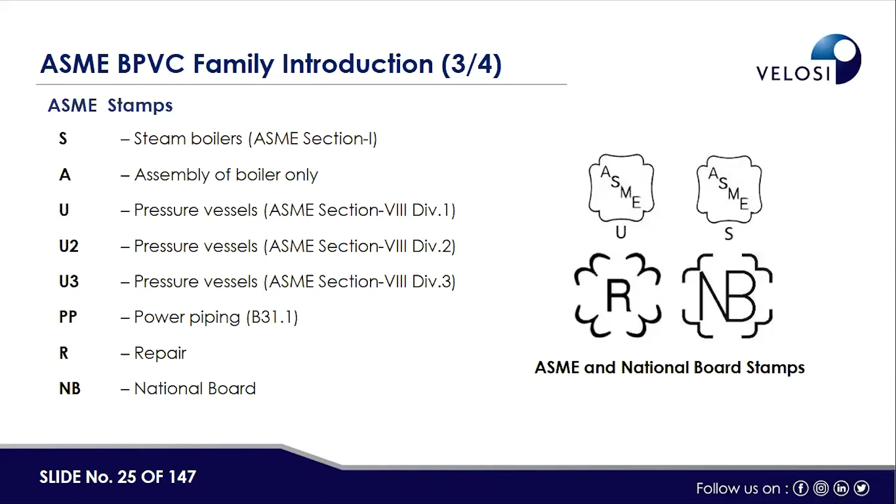See, you might have heard about ASME stamped vessels, or there are workshops who are producing or manufacturing vessels as per ASME Section 8, Division 1, or applicable codes, and they apply various stamps, which are called ASME stamped vessel, and these workshops who are manufacturing these vessels, they are also qualified and authorized by the ASME authorized inspection agencies.

ASME stamps: S is a steam boiler stamp, A is assembly of boiler only, U is a pressure vessel, applicable on ASME Section 8, Division 1. Then U2 is pressure vessel, ASME Section 8, Division 2. Then pressure vessel, ASME Section 8, Division 3. Then PP is power piping, R is for repair, and NB is for national board. Various stamps are there, which people may hear as they enter into the vessel industry.

Design and construction code, from a piping point of view: 31.1 as I referred earlier, then ASME 31.3. There's also for pipeline 31.4, 31.8. Then these codes like ASME Section 1, Section 3, Section 4, and Section 8, Division 1, 2, 3. These are normally called design and construction codes, whereas supporting codes are ASME Section 2, Section 5, Section 9.

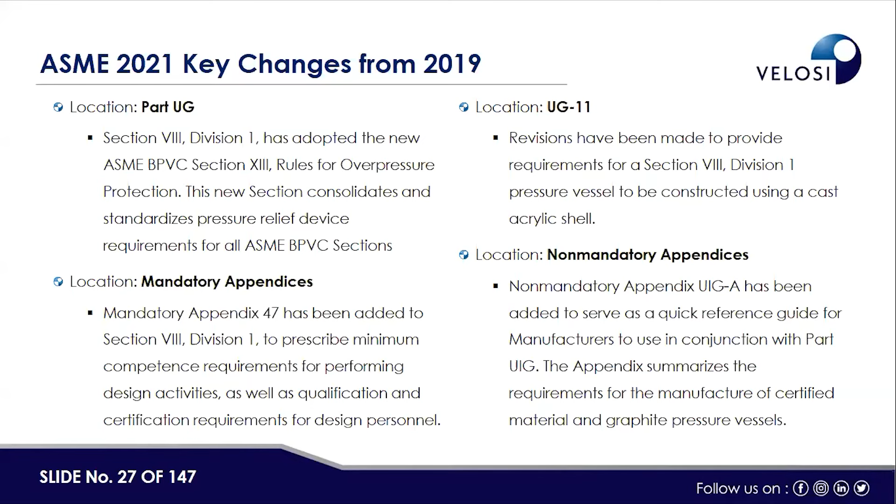Location part UG was changed, and location UG 11 was changed, and location mandatory appendices, certain changes are made, and location point of view non-mandatory appendices, certain changes are made. So we don't need to go through this, but we will from a presentation point of view. These are the details of what ASME publishes at the time of changes when a new edition is being issued.

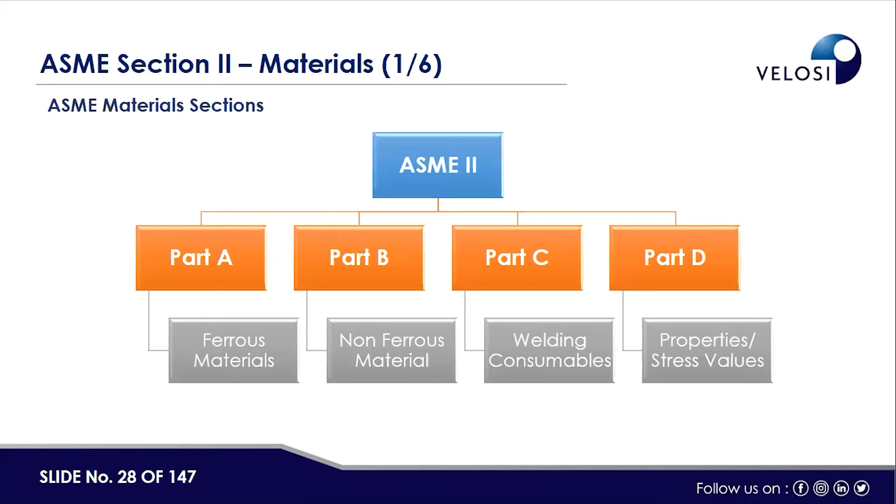Now, if we go to ASME Section 2, which is the first code, which is basically a supporting code. So it is a materials selection and material property code, where part A, part B, part C, and part D — part A is ferrous material, part B non-ferrous material, then part C is welding consumables, and part D is the properties and stress values of the various materials.

Then from ASME material introduction point of view, Section 2 — it is classified material based on name and grade. Ferrous materials start with SA, non-ferrous materials start with SB, welding rods, electrodes, and filler material start with SFA. Part A, B, C provide information regarding ordering information, manufacturing processes, hot cold forming, normalizations, and others.

Then chemical properties like carbon, manganese, sulfur, and other contents of the material — it's for steel materials or non-steel materials both. Then mechanical properties like yield, tensile, elongations, hardness, and other properties. Supplementary requirements, which are lamination and impact tests.

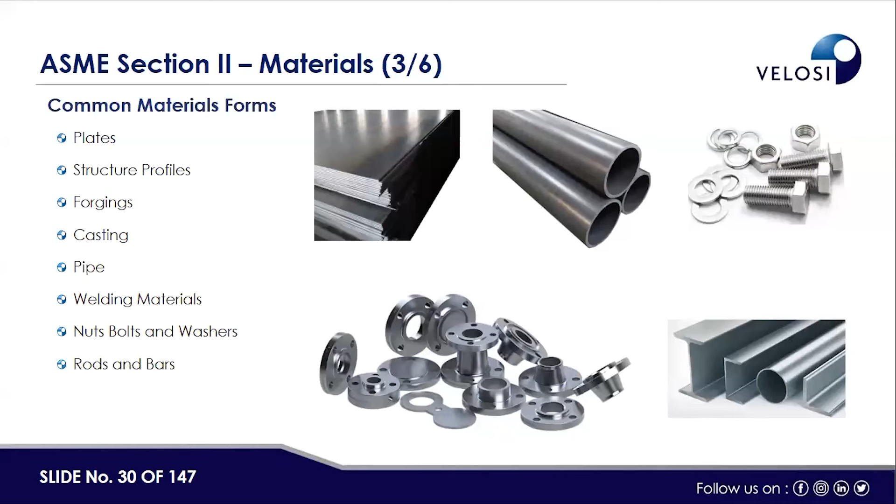Common material forms point of view are shapes what we normally use — these are plates, structural profile, forgings, casting, pipe, welding materials, nuts, bolts, washers, rods, and bars. Like all materials which are used for manufacturing of pressure vessels or pressure containing components, there could be various shapes. So we should be familiar with those.

Then in Section 2, next is types of material. Carbon steel is one type, low alloy steel, high alloy steel, then non-ferrous material, cladded materials. So carbon steel family point of view, the names which are common are SA 516 grade 70, 60. Then there's also SA 285 for piping. There's SA 106 grade AB and SA 53. For flanges, SA 105. And for structural steel is SA 36.

Low alloy steels like SA 387 grade 11. Then high alloy steels are SS, duplex, and other materials. So from a family point of view, if we try to see, like for a carbon steel family, there are various types of materials which are used for pressure vessel components, like plates, pipes, forgings, fittings, and bolting.

So in the same carbon steel family, we try to see plates, let's say SA 516 grade 70, 60, 65, or SA 515 or SA 455. For that, pipe will be coming with a material SA 53 grade B or grade A, SA 106 grade A or grade B. Similarly, forging or the flanges part will be coming as SA 105 or SA 181. Then there is a fitting like SA 234, and bolting material goes by SA 193-B7 as well.

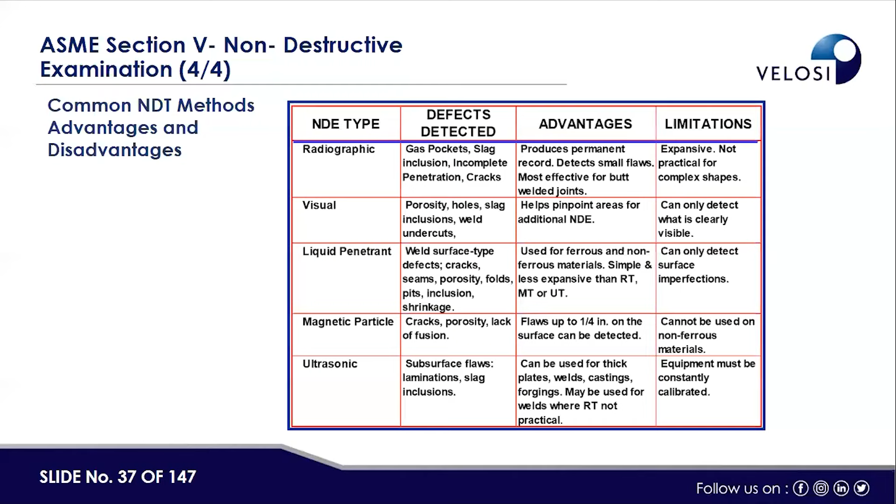Magnetic particle testing is the second technique, but it is used only on ferrous material, where you spray or put iron particles, then bring a magnet, and it tells you the continuity or discontinuity of the surface. Ultrasonic testing uses a reflection or refraction technique of rays. It can be used to see thicknesses and lamination in the material.

So next code is ASME 9. ASME 9 is basically the welding, brazing, and fusing code, for when plates or materials are welded together to make a pressure vessel. So ASME Section 9 provides all the guidelines to carry out welding, brazing, or fusion activities, which are used for building pressure vessels.

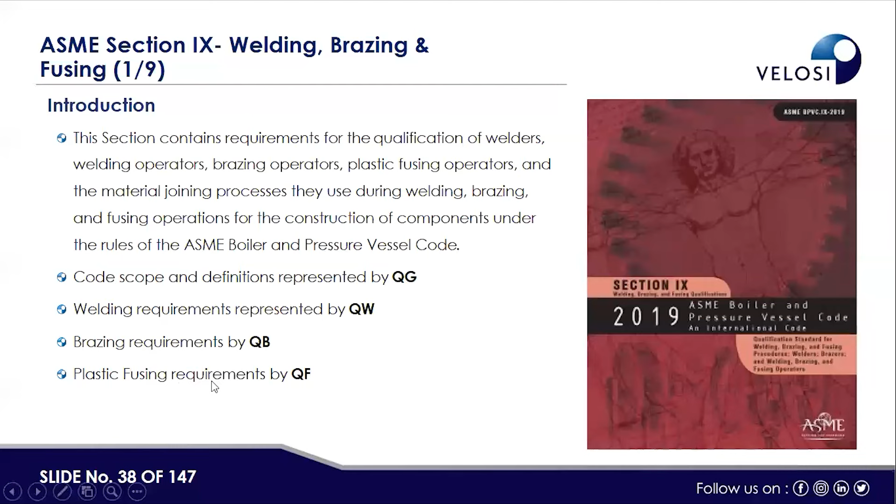From a definition point of view, the code scope and definitions are represented by QG in the code. Welding requirements are represented by QW, brazing requirements by QB, and plastic fusing requirements by QF.

By definition, welding is a technique that joins metals by melting the base metal and causing fusion. Brazing is the metal joining process which produces coalescence of materials by heating them to a suitable temperature and using a filler metal having a liquidus above 840 degrees Fahrenheit or 450 degrees Celsius and below the solidus of the base material. The filler metal is distributed between the closely fitted surfaces of the joint by capillary action.

Fusing is the coalescence of two plastic material members by a combination of controlled heating and application of pressure approximately normal to the interface between them. So these are the three techniques. In pressure vessels, we normally go by welding, and more knowledge is required regarding welding.

Under welding, QW covers the welding requirements, and this is further subdivided. Welding general requirements is QW 100 to QW 190. Welding procedure qualification is covered under QW 200 to QW 290. Welding performance qualification is covered under QW 300 to QW 380. Welding data further covers QW 400 to QW 490. Standard welding procedure specifications are QW 500 to QW 540.

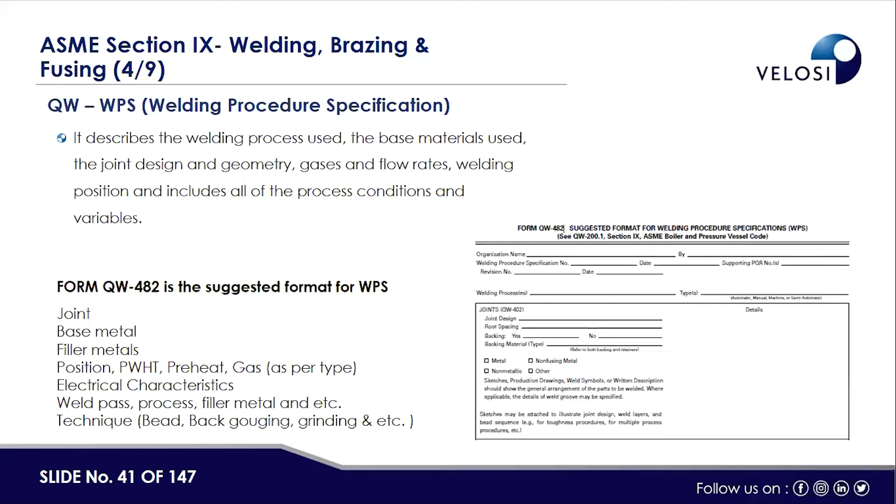There is a form covered under form QW482, the suggested form for WPS, where details can be seen in the standard, which is QW482. It covers joint, base metal, filler material, position, PWHT, preheat, gas type, and electrical characteristics, weld pass, processes, filler metal, and techniques like bead, back gouging, grinding, etc. From a knowledge point of view, you should know these guidelines are available in the standard, and we don't need to remember them by heart.

Then PQR means procedure qualification record. When a WPS is written, it should be practically qualified and applied by a qualified welder. Then whatever the preheat, filler material, position of the weld, speed applied, the weld quality is further checked if we got a homogeneous weld meeting all the required specifications for the welding object. So the document that qualifies the welding procedure specification is called the procedure qualification record.

To qualify a WPS, a procedure qualification plate is welded in accordance with the code requirements and actual test parameters are recorded. Form QW483 is the suggested format to record the PQR.

When the welding process or WPS is being applied, it is applied by welders, by people, or by machine. In that scenario, welder performance qualification is also a mandatory requirement, so it can be ensured that both the technique and the welding process and welder are intact, there is no risk for the object, and we will get homogeneous welding quality. The document required by this code is form QW484, the suggested format for recording WPQ.

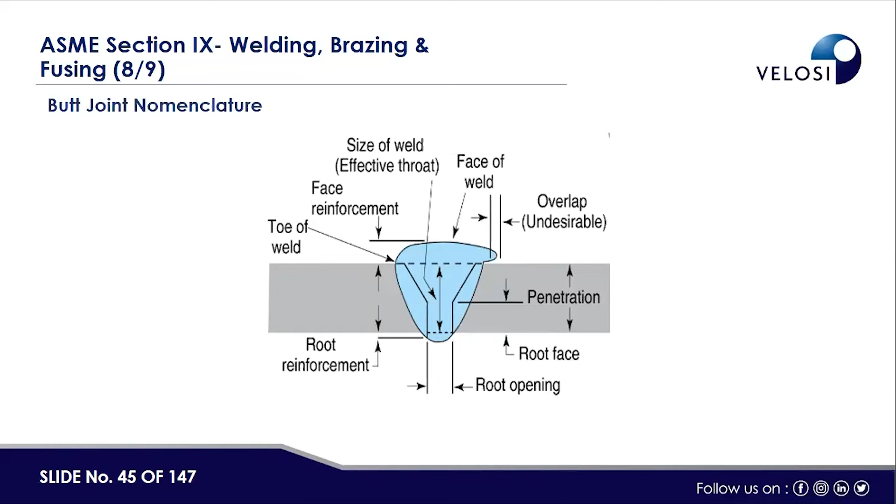Once it's fit up, there are various weld areas. In the bottom, this is called the root opening, then root face. There is penetration from the weld area point of view, face of the weld, size of the weld, effective throat. Then there is face reinforcement on top of the weld. Toe of the weld is where the weld is on the corners, and root reinforcement. So there are various terminologies used while talking about weld inspection, WPS qualification, PQR, or records point of view.

Common weld defects - it's not easy if anyone can come and make a pressure vessel. It's a very sophisticated technology, to be governed by properly qualified people, and the job should be done by qualified welders. If a non-qualified welder does the job, there could be issues, and various kinds of defects could be present in the welds of pressure vessels.

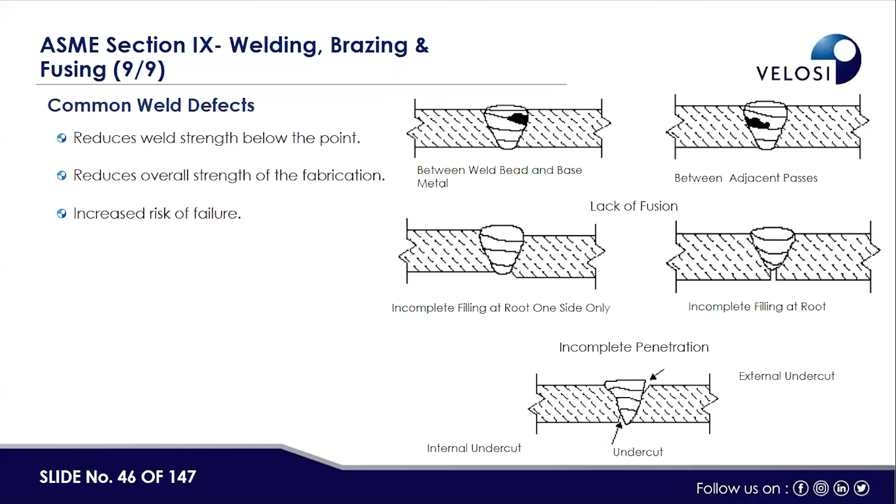Then we are going to another standard after ASME 9, which was basically talking about welding processes and WPS, PQR, and what kind of defects there are, then the common joint types and various forms. This we covered, and these are available in ASME Section 9.

Now, there are flanges connected with the nozzles of the pipes and nozzles of the pressure vessel, and all flange connections are governed by ASME B16.5, called pipe flanges and flanged fittings. This standard covers flange diameters from NPS 1/2 to NPS 24, used to connect pipes and components like valves, strainers, and others, and identifies acceptable pressure-temperature combinations. There are 7 classes in pressure vessels: 150, 300, 400, 600, 900, 1500, and 2500 ratings. Flange strength increases with the class number; material and design temperature combinations without pressure indicated are generally not acceptable.

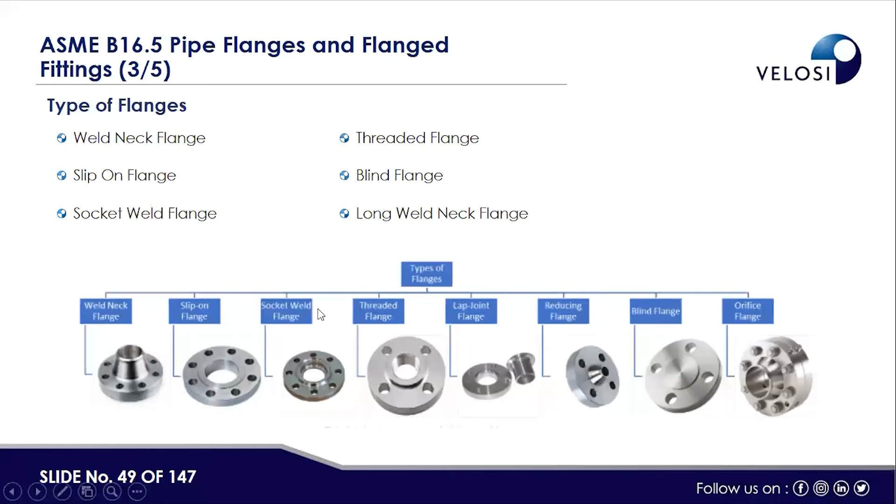Then orifice flange. So various kinds of flanges are there which are used for pressure vessels or for connection of the pipes.

In the construction of pressure vessels, a combination of various kinds of materials would be required because everything is not made of similar carbon steel material or SS material.

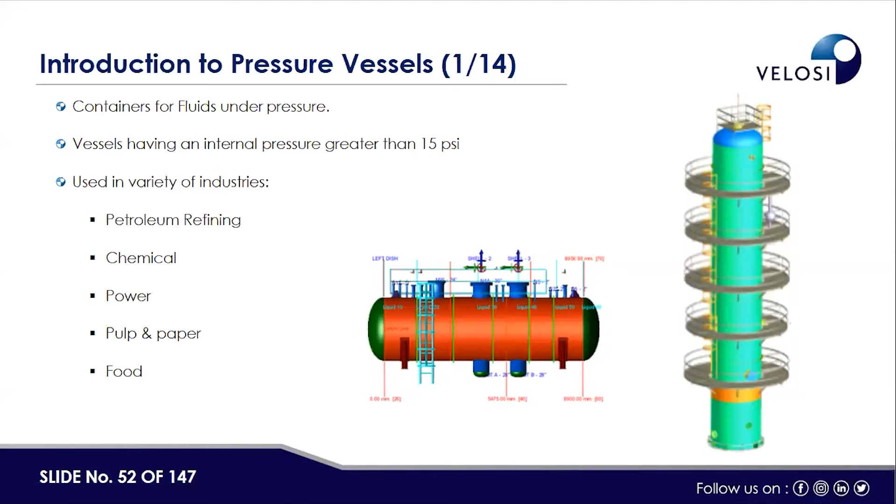Pressure vessels are used in various industries: petrochemical, upstream, downstream, refineries, chemical plants, power plants, pulp and paper, food industry, and pharmaceutical industry. So pressure vessels are used widely.

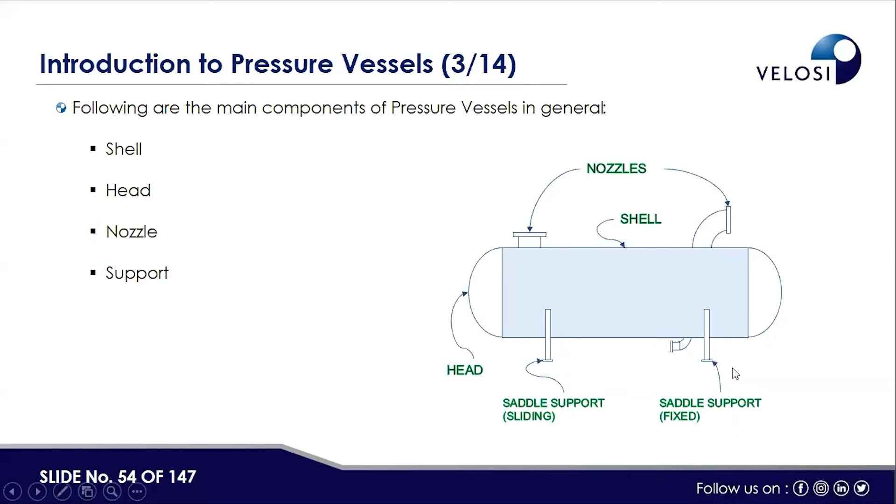So in a normal type point of view, as in the previous slide, there's a shell, head, nozzle, and support. The shell is here, and the nozzles are flange nozzles, and this is a saddle support, which is at the bottom side of a horizontal vessel - just to get familiar, for people who are new to pressure vessels.

The shell is the primary component that contains the pressure in the vessel. A pressure vessel shell is formed from different plates welded together to form a structure that has a common rotational axis. Shells are either cylindrical, spherical, or conical in shape generally.

The nozzles, like when a pressure vessel is connected with incoming pipes and outgoing pipes, you need to have those connections, and that's called a nozzle. A nozzle is a cylindrical component that penetrates into the shell of the pressure vessel or head of the pressure vessel to allow entry or exit of fluid from the pressure vessel.

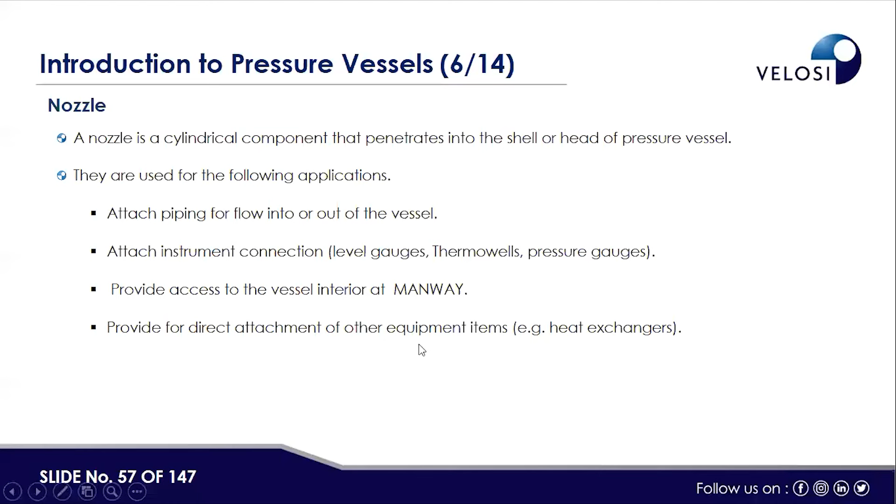They are used for the following applications: attaching piping for flow into or out of the vessel, attaching instrument connections like level gauges, thermowells or pressure gauges, providing access to the vessel interior at a manway (manways are also a form of nozzle), and providing for direct attachment of other equipment items, for example, a heat exchanger could be connected directly to the pressure vessel.

Supports: a vessel has to be supported vertically or horizontally, and these supports are also welded with the pressure vessel. Support is used to bear all the load of the pressure vessel, earthquake and wind loads. There are different types of support used depending on the size and orientation of the pressure vessel. It is considered to be the non-pressurized part of the pressure vessel.

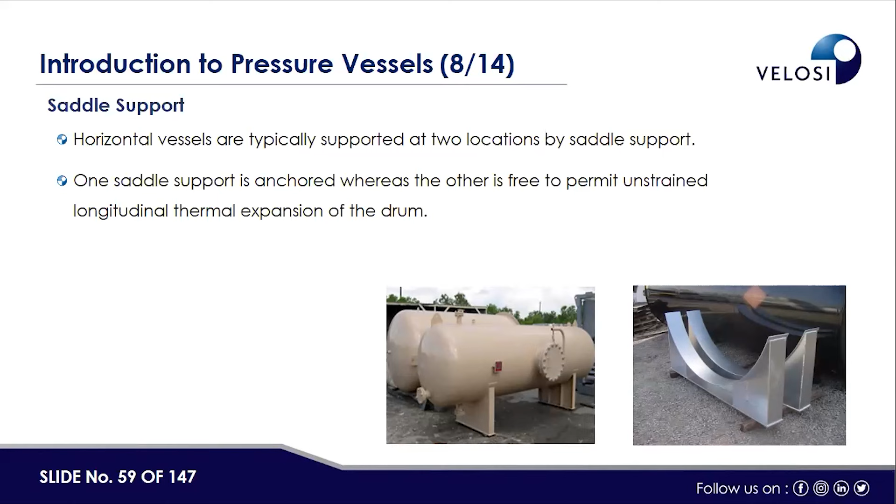A saddle support is used for a horizontal vessel. There's a bottom plate which you can see here, called basically saddle supports. When applying these supports, one side is normally fixed, the other is sliding, so the thermal expansion of the horizontal pressure vessel could be accommodated.

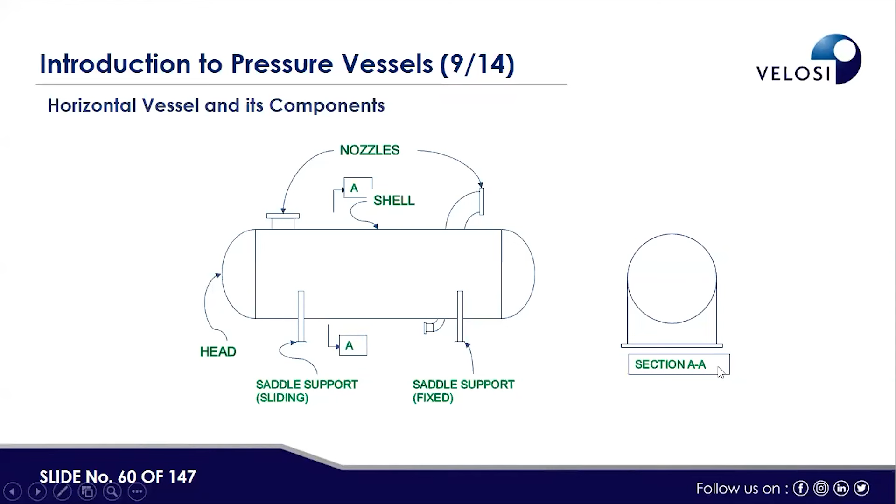So again, the component is coming for a horizontal pressure vessel as well as a vertical pressure vessel. This saddle support comes at the bottom, the others are the shell, nozzle or head. And section-wise, if you see a pressure vessel on one side, it looks like this.

Leg supports: some pressure vessels are supported by various kinds of supports - leg, lug, skirt. These are the three main names used for supporting pressure vessels. Leg means these are the legs you can see on the side, and spherical vessels are also supported by legs. Small vertical drums are typically supported on legs that are welded to the lower portion of the shell.

Reinforcement pads are welded to the shell first to provide additional local reinforcement and load distribution. Support legs are also used for spherical pressurized storage vessels.

So this is a vessel. A vessel is supported on a platform intermediately. These kinds of supports are called lug supports.

Then the example of a vertical reactor. What could be new in the vertical reactor? There could be a catalyst bed, or catalyst bed support, lower catalyst bed, and then the lowest bed catalyst bed support also. Then head, inlet nozzle, outlet nozzles, and outlet collector or shell.

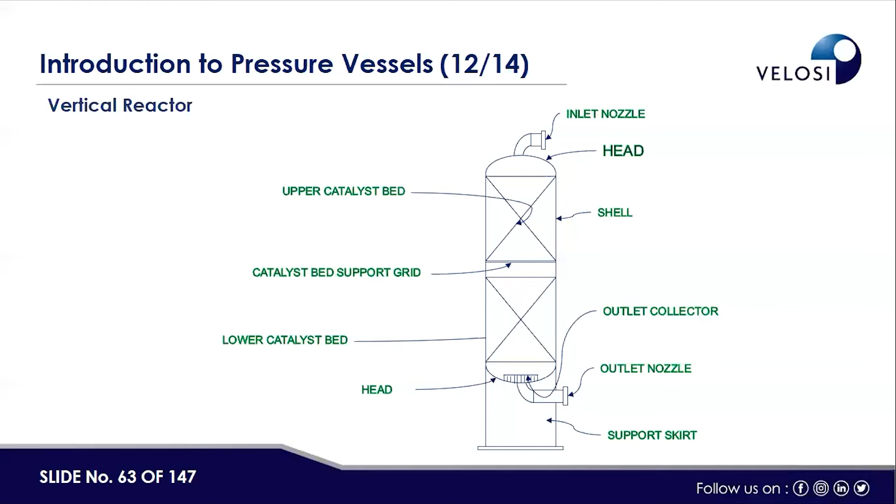So if we change this pressure vessel into a reactor form, there would be changes only in the internals. Outside, it will remain just like a pressure vessel. There would be additional fittings made inside the pressure vessel, or there could be a catalyst, and various distribution equipment installed inside the reactor.

Skirt support, for example, a vessel supported at the bottom. If you see this vertical vessel, this part is called skirt support. And if we make a model in PV Elite, this conical part is called bottom skirt.

There could be a top skirt also if it's made in two parts, like a vessel starting here in the head onward, and the bottom part is called skirt. Skirt is a non-pressure bearing component, and it is made to support the pressure vessel at the location where it is installed.

Then vessel support design: how we design these pressure vessel supports. There is an equation, normally we call it for horizontal vessels the L.P. Zick method. Commonly governing the stresses in the saddle support are bending stresses, tangential stresses, circumferential stresses, horn of saddle, and bottom of the shell. The supports are designed on wind and seismic codes.

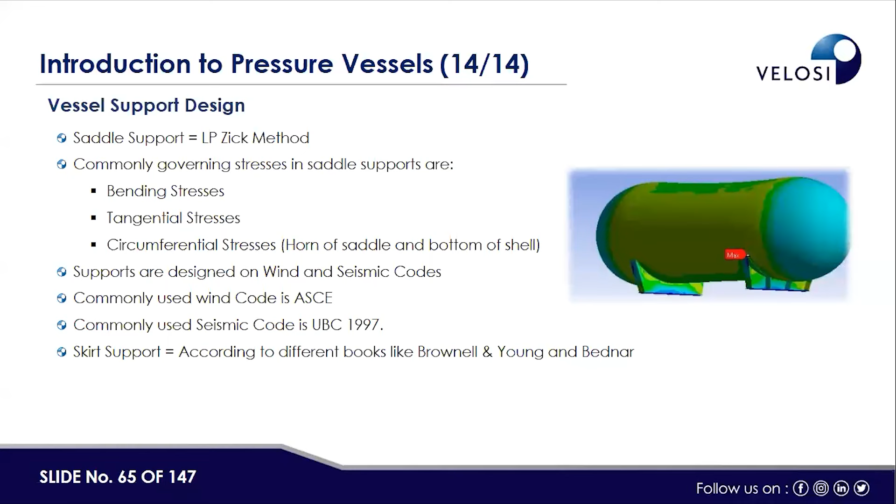Commonly used wind code is ASCE, and commonly used seismic code is UBC, which is normally called the building code. Then skirt support is designed according to different books like Brownell and Young, and like Bednar. These are basically the handbooks which are also available to design the vessel skirt supports.

ASME Section 8 provides requirements applicable to the design, fabrication, inspection, testing, and certification of pressure vessels operating at either internal or external pressure. This code was established in 1925, Section 8 Division 1. ASME Section 8 Division 1 operating pressure ranges from 15 psig to 3000 psig.

It works with a safety factor of 3.5. Before year 2000, this safety factor was 4, and it was reduced to 3.5 during the year 2000. It works normally under the membrane stress formulas, both longitudinal and circumferential stresses.

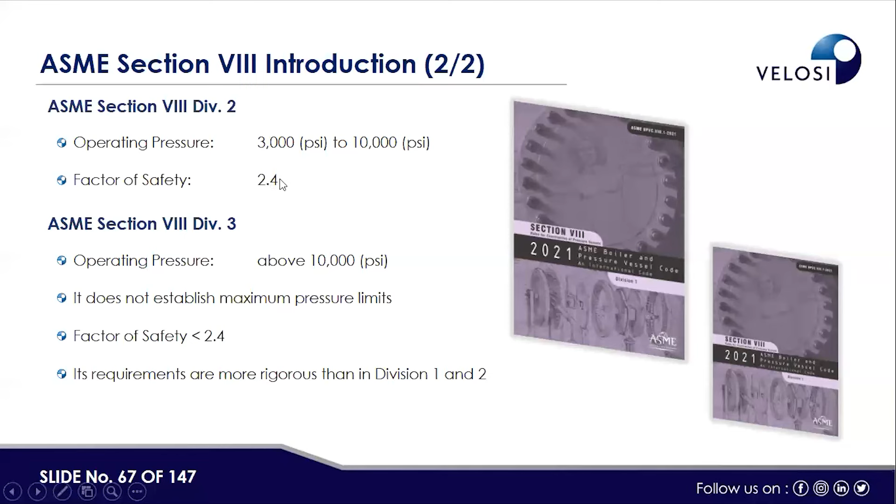Normally in the oil and gas industry, we remain between ASME Section 8 Division 1 and Division 2. I have never come across Division 3 for pressure vessels.

So now here, various codes by U1, U2, U3, U4, and U5: scope, general, standard reference by this division, units of measurement, tolerances, then section. This is how the code is organized.

From an information and index point of view, when we say anything under UG, it will be providing design guidelines with reference to materials, design itself, fabrication, general requirements. UG means general requirements with reference to inspection, marking, and over pressure protection.

Then subsections, for example, UW means welded pressure vessels. UF means forged pressure vessels, if there are any. Then UB means brazed pressure vessels.

Then some sections, from a material point of view: UCS is carbon and low alloy steels, UNF is non-ferrous material, then high alloy steel and so on.

So depending on what kind of material is being used for the pressure vessel when we go to the design side, we can go to the relevant section. For example, if it is a low temperature service of a pressure vessel, then ULT, low temperature service, can be applied. Similarly, cladding and lining aspects are covered under UCL.

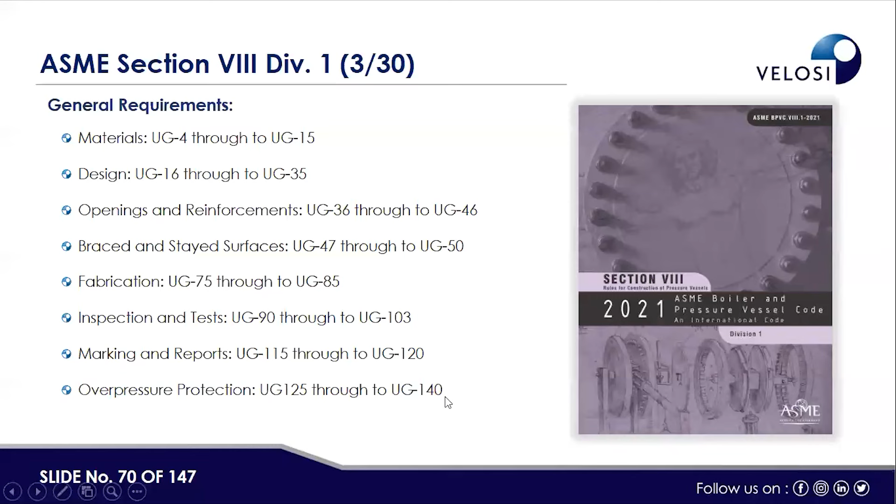Then fabrication aspects are covered under UG75 through UG85. Inspection and tests are covered under UG90 through UG103. Marking and reports are UG115 through UG120. Overpressure protection is UG125 through UG140.

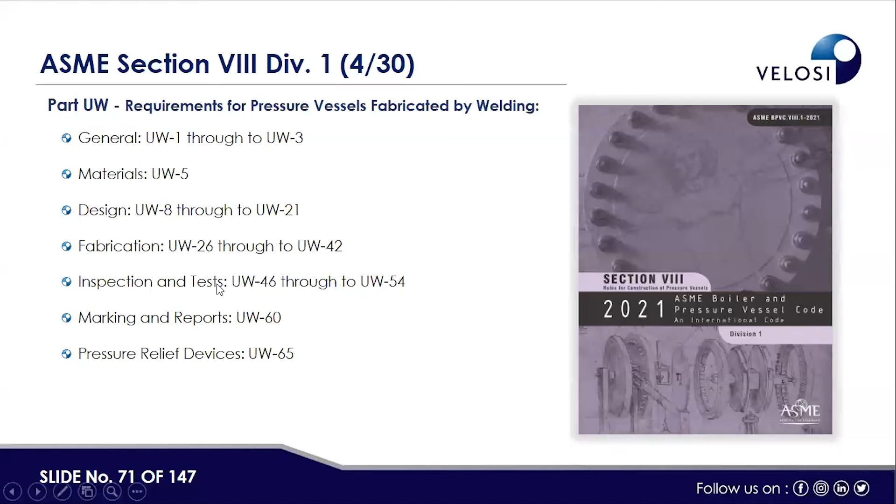Then requirements for pressure vessels fabricated by welding, the UW part, the first part we covered as the UG part, general requirement. Now UW requirement, from a welding point of view: general through UW3, then material UW5, design UW8 through UW21, fabrication UW26 through UW42, and so on.

Then UCS, requirement for pressure vessels constructed of carbon and low alloy steels. So UCS1 general, materials UCS5 through UCS12. Here UCS66 is more common at low temperature, that is MDMT, impact testing. So UCS66 is a more common standard clause which I think most pressure vessel designers are familiar with.

And they need to keep that also for the prevention of fatigue failure or brittle fracture failure of pressure vessels. Then fabrication UCS75 through UCS85, since most pressure vessels are fabricated or made of carbon steel and low alloy steels. So these clauses are more relevant to us in normal day-to-day use.

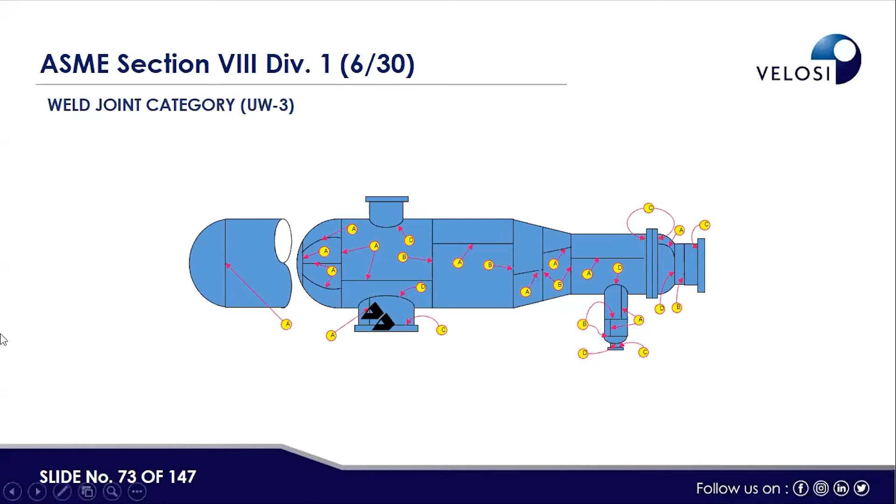When we're making a pressure vessel, if it's a horizontal one like a reboiler, it gives a good example of how it would be welded and what kind of welds would be applicable. Here the types of welds are like a butt joint, a straight one - A type, then B type, D type, B type.

Various types of welds are configured for welding design and quality control purposes. If you see acceptable joint categories A, B, C, D, these are based on what kind of radiography or how much radiography would be done. Full radiographic efficiency could be 1, spot could be 0.85, and with no radiography we have to take the joint efficiency as 0.7. That's used further when calculating the hoop stress formulas.

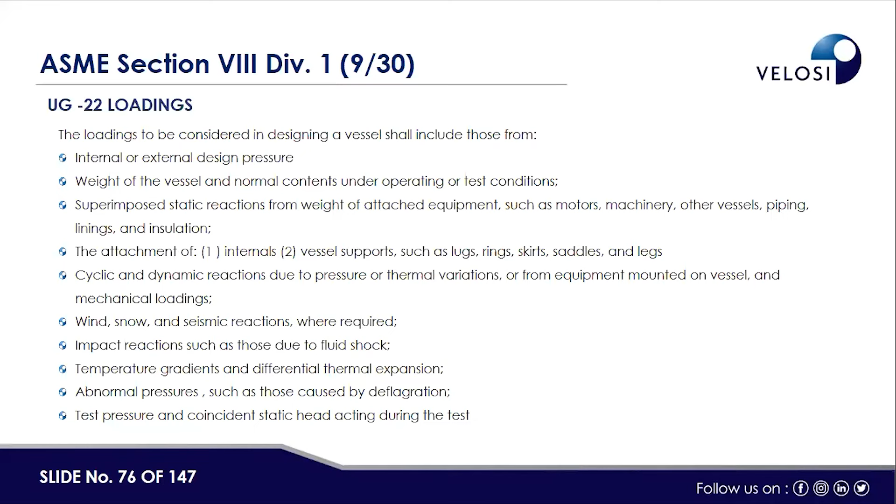The pressure vessel might be designed under cyclic service, in which case cyclic load has to be taken. There could also be wind load, seismic or earthquake loads, and piping connected to it, so their loads might also come on the nozzles of the pressure vessel. We need to consider all applicable loads while designing the pressure vessel itself, its supports, and its nozzles.

Now, minimum thickness requirement, for example under UG16: for general service, any pressure vessel thickness should not be less than 1.5 mm. For air, water, or steam service, the minimum thickness of any pressure vessel, irrespective of diameter, should not be less than 2.5 mm. Similarly, for unfired steam boilers, the minimum thickness referred is 6 mm in UG16 of the standard.

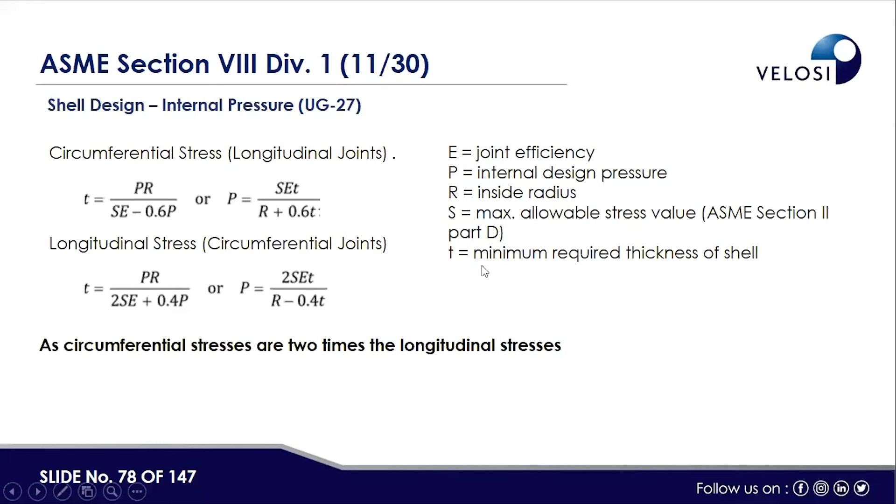These are just formulas - hoop stress formulas for circumferential stresses and for longitudinal stresses. If you see from the longitudinal stresses point of view, the thickness required is half of the circumferential. So circumferential stresses are almost double the longitudinal stresses, where E is joint efficiency, P is internal design pressure, R is inside radius, S is maximum allowable stress value, and T is the minimum required thickness of the shell.

Similarly, for elliptical heads, similar formulas apply with little modification, and for hemispherical heads as well. For flat head design under internal pressure, the formula is t equals d root CP over SE, which is covered under UG34, whereas UG32 is for the elliptical or hemispherical heads.

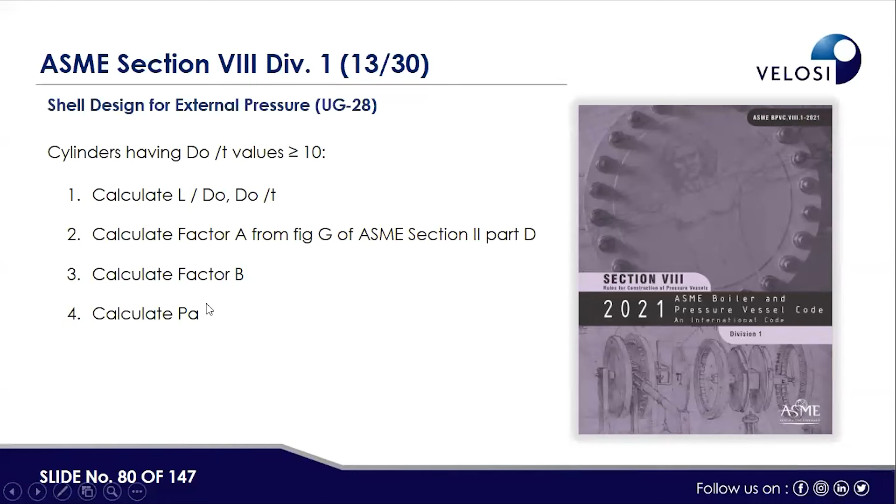Shell design for external pressure is also important. Here, if D naught to T value is greater than or equal to 10, calculate L over D naught first, then calculate factor A for figure G of ASME section 2 part D, calculate factor B, and calculate PA. Accordingly, the stiffeners and external thickness aspects are calculated.

Then design of the pressure vessel nozzles, nozzle opening, or reinforcement - these are covered first by UG37 onward for design guidelines. Then the pipe, which is used for the nozzle of the shell like a cylinder, is covered by ASME B36.10. Flanges are covered under ASME B16.5. Reinforcement pads are designed as per the code.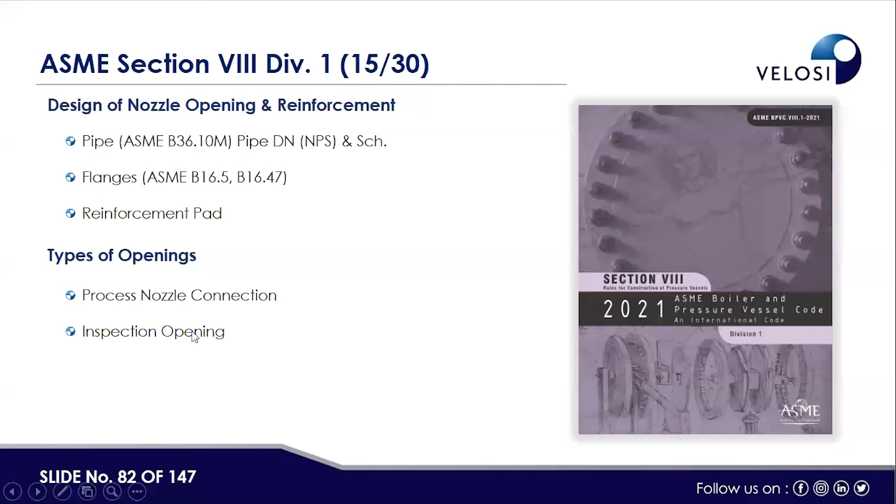The type of opening could be a process nozzle connection or an inspection opening. Process side connections are with pipes or instruments, while inspection openings could be manways. These nozzles can be connected as pipe welded to the shell, then pipe connected with the flange and reinforcement pad, connected with the incoming piping or instruments.

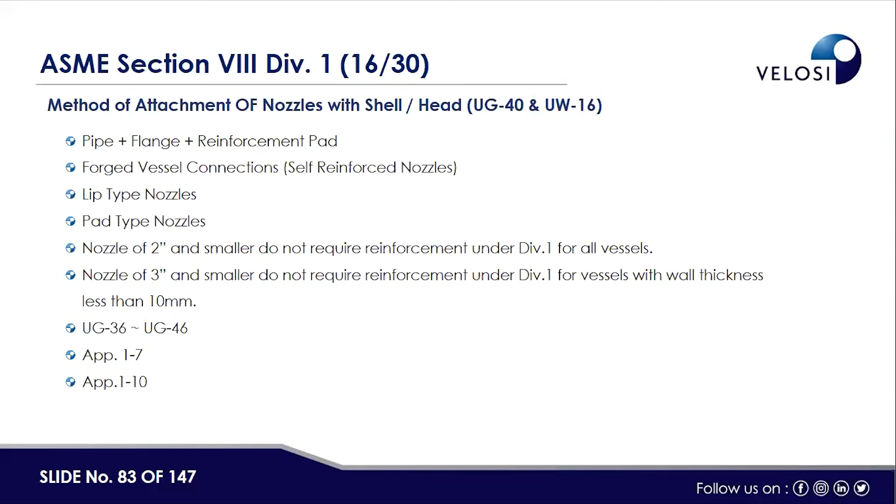Then forged vessel connections, self-reinforcement nozzles, lip type nozzles, and pad type nozzles are also there. Nozzles of 2-inch and smaller do not require reinforcement under Division 1 for all vessels. Nozzles 3-inch and smaller do not require reinforcement under Division 1 for pressure vessels with wall thickness less than 10 mm. UG36 to UG46 are helpful for calculation of nozzle reinforcement. Also, Appendix 1.7 and Appendix 1.10 are guidelines for nozzle design and reinforcement.

From a limitation point of view, what would be the maximum nozzle diameter? For a vessel where the diameter is like 1.5 meters or 1500 mm, the nozzle diameter is half of the vessel diameter, but not more than 500 mm.

It is not the case that we can make any size of nozzle on a small diameter vessel. If the diameter of the vessel is greater than 1500 mm, then it can be up to 1/3 of the vessel diameter, but not more than 1000 mm. Exceeding these limits, additional requirements of Appendix 1.7 shall be applicable. Nozzle may also be designed with alternative rules of Appendix 1.10 pressure design. These are applicable as well.

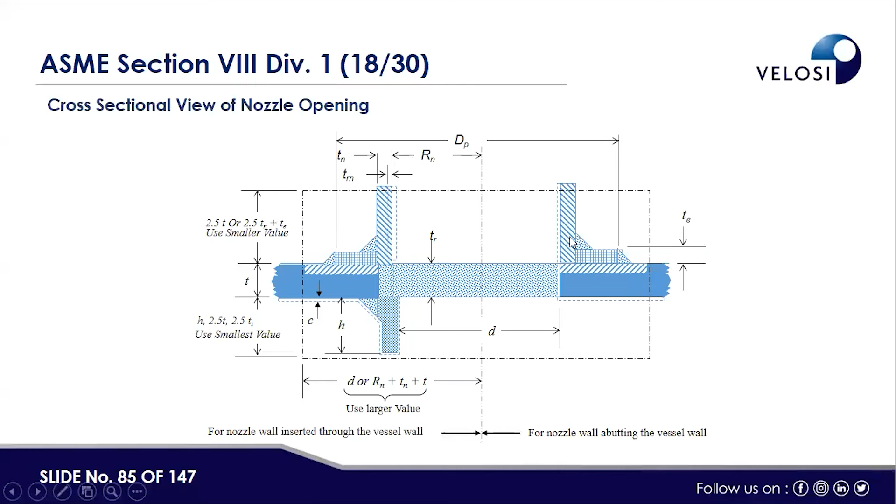So here, if you see the nozzle on a pressure vessel, it is showing various kinds of connections. It's not practical, but it is shown like there could be a reinforcement pad, the base metal, the nozzle itself, and welding - fillet welding, butt welding. Those aspects are shown in this drawing. And here, internal diameter, external diameter, the various dimensions marked on the drawing, base metal itself, reinforcement, or the edges are also shown here.

Then additional reinforcement, for example reinforcement pad, necessary if insufficient excess thickness, must be located within the reinforcement zone. Allowable stress of reinforcement pad should be same as that of shell or the head. Additional reinforcement sources like pad could be, or additional thickness in the shell or lower part of the nozzle could be an integrated part as well.

Then, design of the nozzle opening and reinforcement, the method used by UG-37 and Appendix 1.7 for reinforcement of the nozzles. The simplified ASME rule, area replacement - metal used to replace what is removed should be compensated, must be equivalent to the metal area which is removed by the nozzle, if the same can be provided by the reinforcement pad. Must be adjacent to the opening. Limit of reinforcement is defined under UG-40.

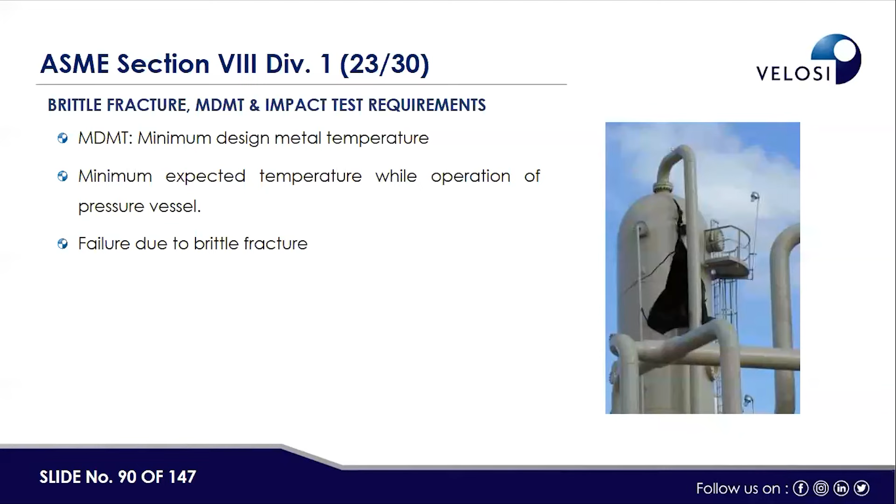So brittle fracture and MDMT, meaning minimum design metal temperature, and Charpy test or impact test - these are the very commonly used terms in welding qualification, WPS qualification of pressure vessels. MDMT is the minimum design metal temperature, the minimum expected temperature during operation of the pressure vessel. High temperature we always take care of, so we have to take care of low temperature as well. Failure due to brittle fracture means if toughness of the material is lost due to low temperature, and if load is applied at the same time, then the vessel may fail.

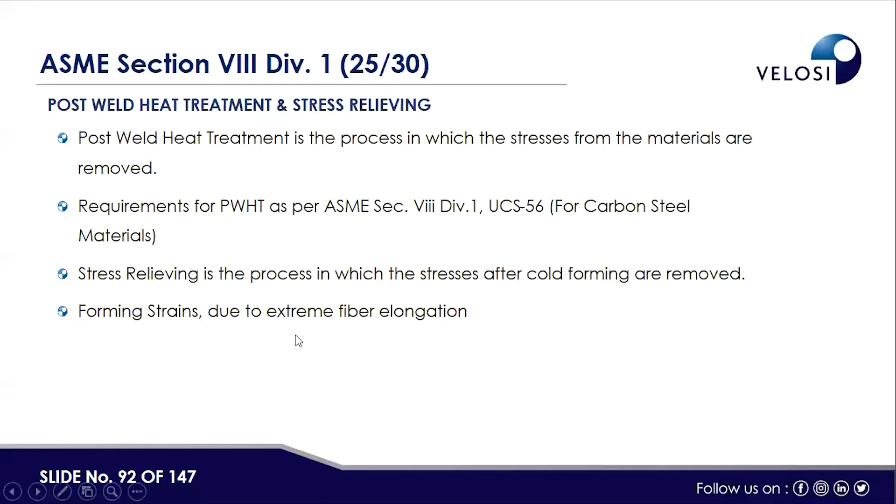PWHT is done to minimize the stresses or residual stresses in the weldments which could be caused by the welding activity. Post-weld heat treatment is the process in which stresses from the material are removed. Requirement of PWHT as per ASME Section VIII, Division 1, UCS 56 for carbon steel material should be referred. Stress relieving is the process in which stresses after cold forming are removed, as the forming strains due to extreme fiber elongation could be caused.

When post-weld heat treatment or stress relieving is required as per UW2, UW40 and specification, PWHT must be performed according to UCS 56 and table UCS 56 as well. Review the PWHT specification for specified thickness and material, and verify the PWHT graph as per UCS applicable standard requirements. So PWHT and UCS 66 are the two requirements which are applicable based on the thickness and nature of service of the pressure vessel.

Hydro testing: once the vessel is fabricated and ready to go for installation, hydro testing is done. Before that, under fabrication stage, various kinds of NDT tests are done, then under welding qualification, UCS 66 Charpy test or welding qualification test and mechanical tests like tensile stress tests are conducted. If due to thickness some PWHT is required, that is covered under UCS 56, and hydro testing is the last activity when the vessel is ready to go.

This is a non-destructive test part, and normally the hydro test pressure, for a water-filled vessel, is tested at 1.3 of MAWP multiplied by lowest stress ratio. Lowest stress ratio means stress at water test temperature versus the maximum design temperature of the pressure vessel, i.e., allowable stress at test temperature and allowable stress at design temperature.

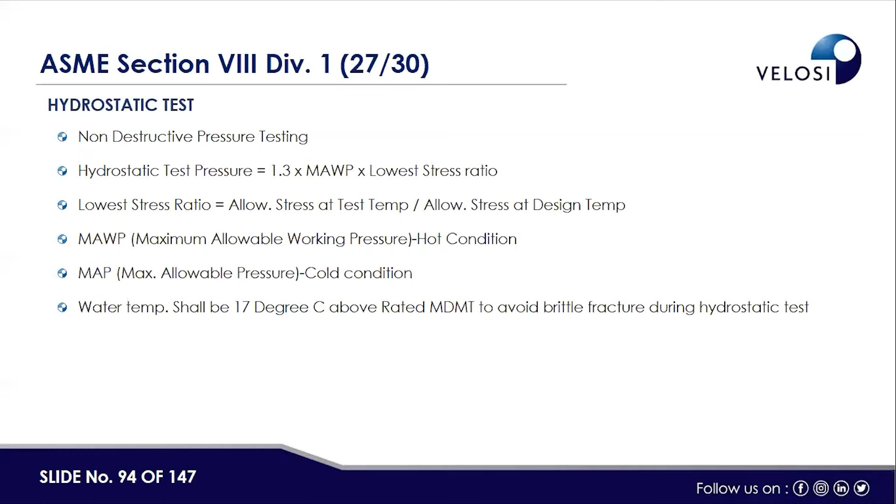There are also certain requirements, like water should be drained and the vessel should be dried, so no post hydro test effects are caused by water left inside the vessel. The vessel shall be tested after completion of all fabrication and examinations, as per UG 99, which is the standard requirement, or UG 99 A1 and A2 requirement.

Cosmetic work and grinding on the base metal is allowed after this test. No other modification is basically allowed. The test pressure is already qualified as we discussed.

If the vessel cannot be tested by hydro testing, then it can be tested by pneumatic testing, using air or nitrogen. It is a more complicated and dangerous activity because explosion may take place during pneumatic testing. So under pneumatic test, vessels are kept in a guarded and safe location, so they are not exposed to humans if any explosion takes place.

This test can be performed instead of hydrostatic test if the hydrostatic test is impractical. Pneumatic test pressure is 1.1 of MAWP multiplied by the lowest stress ratio. Pneumatic testing is dangerous for high pressure due to the compressibility of air, which may cause explosion at some stage.

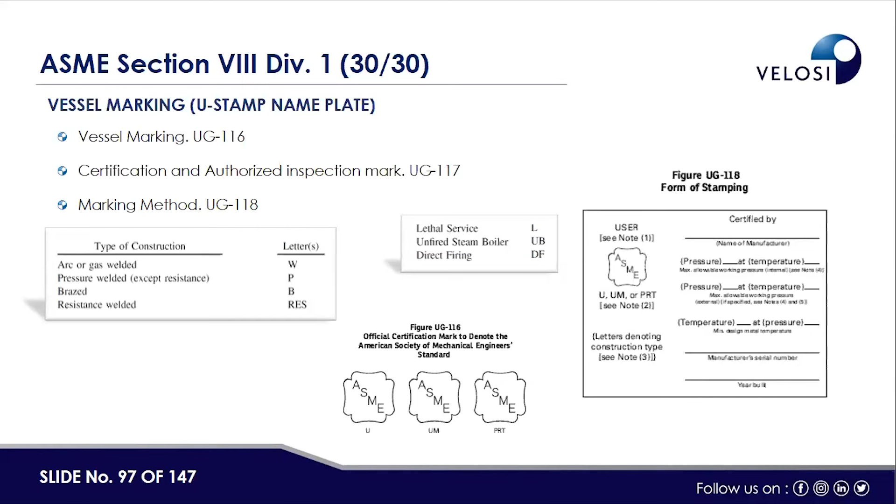Then vessel marking and U-stamping, which is normally the last activity. Vessel marking should be done as per UG 116, certification and authorized inspection mark is UG 117, and marking method is given under UG 118. So all these guidelines are provided, and if we try to follow the code, it is well-defined.

It can be used easily by the parties with certain guidelines and supervision, but it's not a difficult activity. Then steps for normal pressure vessel design: scope defined by the client in RFQ. RFQ contains data sheet, sketch with nozzle orientation, and pressure vessel specification, provided by process design or as part of P&ID or equipment layout drawing. So mechanical designers are somewhat blessed because they get complete orientation and size of the nozzle and vessel, and mechanical engineers are required to design a pressure vessel only as per ASME Section 8, Division 1, Division 2, or Division 3, or as per BS PD 5500.

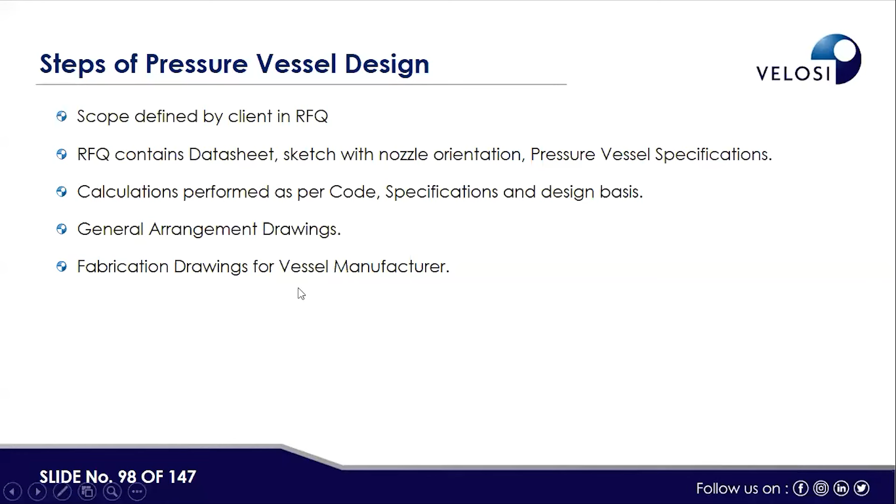Then calculations are performed as per code specification and design basis. General arrangement drawings are prepared, and fabrication drawings for pressure vessel manufacturers are also prepared. Other than ASME 8, there is also BS PD 5500, a British standard used in certain areas. Then BS EN 13445 is the unfired pressure vessel design code, used in certain European Union countries.

So before I go to the case study, there are some questions we can answer, Mr. Kale. Yes, sir. Here's a question.

Is there any guideline for consideration of slope in designing a horizontal vessel, 1:100 or 1:500? These slope requirements depend on where the drain nozzle is located. The slopes are provided based on process requirements and nozzle location, so the vessel can be emptied in case of drainage. So the thumb rule you indicated exists, but it depends upon the length and diameter of the vessel and the nozzle location for the drain.

Next question: is it relevant only for mechanical engineering students or for other types of engineers? Pressure vessel design is mainly handled by mechanical engineers, but I'm a chemical engineer, and I've also been doing pressure vessel design. So chemical or mechanical engineers can do pressure vessel design, but it will be a distance away from electrical support design. They are more relevant there.

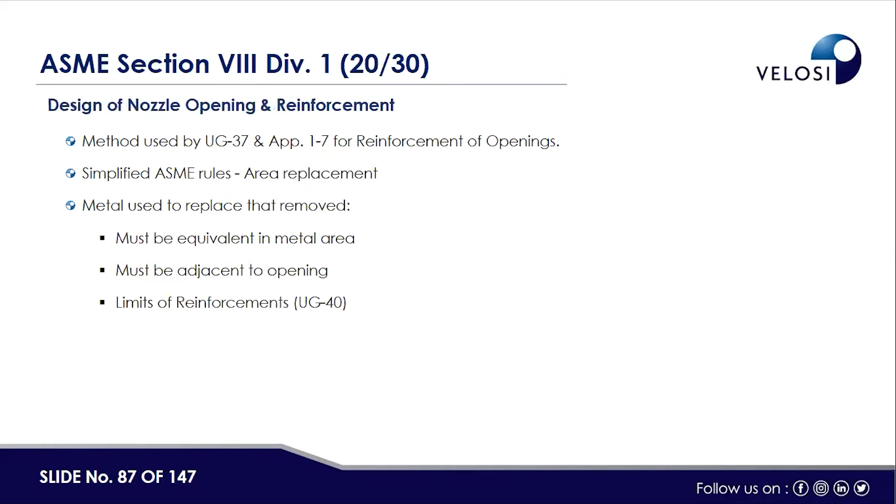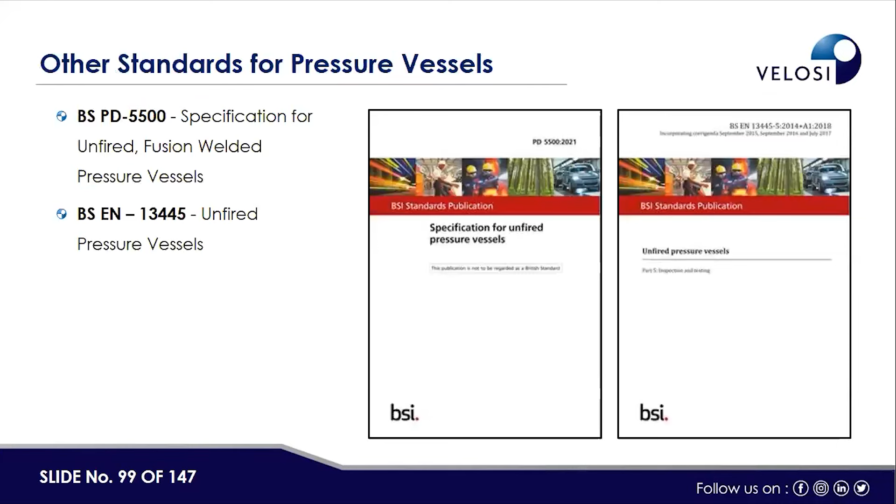Next question: could you please explain the difference between ASME Section VIII, Division 1, 2, and 3?

See, basically these three standards, only difference is pressure range. Division 1 is applicable from 15 to 3000 psig, Division 2 is applicable from 3000 to 10,000 psig, and Division 3 is applicable above 10,000 psig pressure. So that is the difference in the range of pressure.

And similarly, there is a compromise on the safety factor. For Division 1, safety factor is 3.5. For Division 2, the safety factor is 2.4. And similarly, for Division 3 also, safety factor is below 2.4. So someone can say, why is there a lesser safety factor for high pressure vessels? The point is thickness is too big to accommodate that. And secondly, additional checks, additional fatigue, and additional material quality requirements are added for Division 2 and Division 3 pressure vessels.

Next question: Can we do PQR without having WPS? See, there are steps. First WPS, then PQR. It cannot be before.

Next question: If the design pressure is below 15 psig, can users still select ASME Section 8? If you go by API 650 tanks, design pressure is 2 to 3 psig. And then there is ASME API 620, where pressure range is up to 15 psig. So other codes and specifications are applicable, which can be used at low pressure vessels.

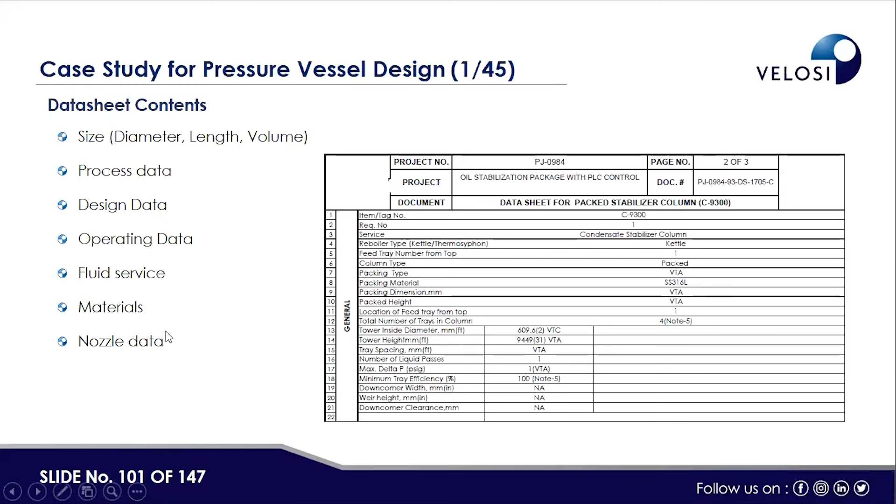When we design any pressure vessel, we get a complete detail from the user or process side, who needs this pressure vessel for their process reasons. There would be a data sheet giving diameter, material of construction, nozzle sizes, nozzle orientations, and type of support. As mechanical engineers, we need to design that pressure vessel by applying applicable mechanical calculations. The data sheet normally includes diameter, length, volume, process data, design data, operating data, fluid, service, material of construction, nozzle orientation, and nozzle data with diameter ratings. It also carries the design code, sketch of nozzle orientation, platform, and structures associated with that particular vessel, insulation, site parameters, wind data, seismic data applicable to that area, and weather data.

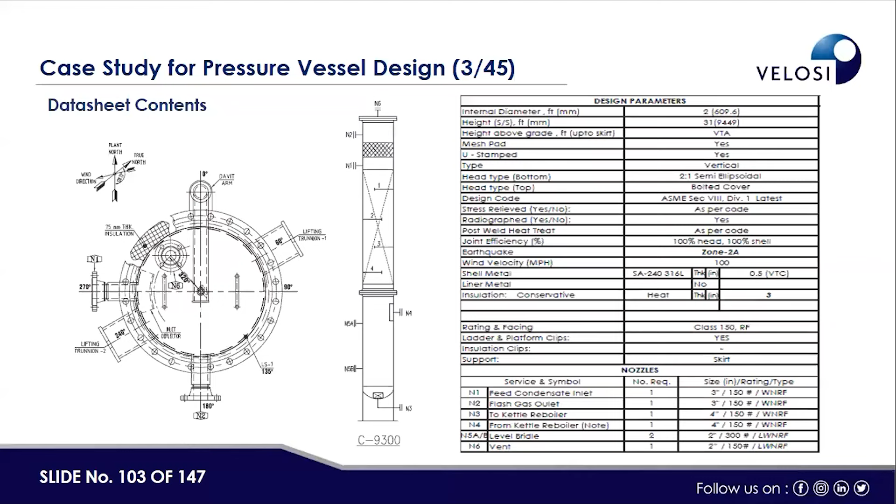Then it's ASME Section VIII Division 1, with an elliptical head - 2-to-1 semi-ellipsoidal head in combination with 2-to-1, then a bolted cover. All these requirements are provided, and we are supposed to do the mechanical calculations for all portions and make fabrication drawings which can be used by the fabrication yard or workshop to manufacture the vessel accordingly.

Specification means all the guidelines with reference to design point of view, loads point of view, load combination point of view. If a client is looking for some additional feature over and above ASME VIII Division 1, those requirements could also be there, and the manufacturer follows the specification of the owner.

So all these requirements are specified along with the data sheet and nozzle orientations, and then mechanical engineers try to design the pressure vessel.

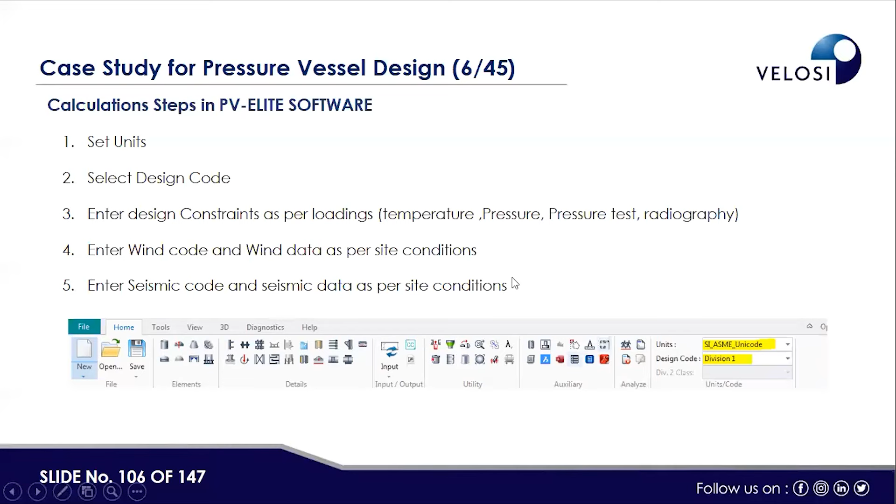Calculation steps in PV Elite software: set units, select design code - this is how we do it. Enter design constraints as per the loading, temperature, pressure test, radiography. Enter wind code and wind data as per site conditions. Enter seismic code and seismic data as per site conditions, as provided in the data sheet and specification.

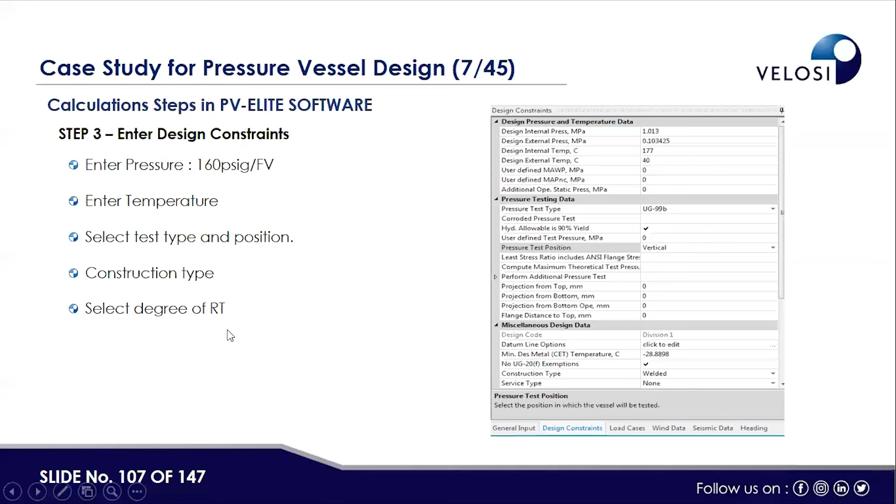Enter design constraints - for example, pressure vessel design at 160 psig and full vacuum from outside. Enter temperature, the design temperature of the vessel. Select test type and position, construction type, and select degree of RT - whether full, random, or spot.

Step 4: enter wind data. There's basically ASCE 95 and UBC 1997, with conditions like seismic zone, importance factor, seismic coefficient, near source factor, seismic zone 2A, and force factor, and similarly for the wind side - wind speed, vertical position, and so on.

The next part is to enter data - you generally start from the bottom side of the tower. This is the skirt, and then there's a head connection point. We enter bottom skirt data and its base ring, enter bottom dish data, enter data for shell 1, enter data for intermediate flange 1 and 2, then enter data for inter shell 2, shell 3, and shell 4.

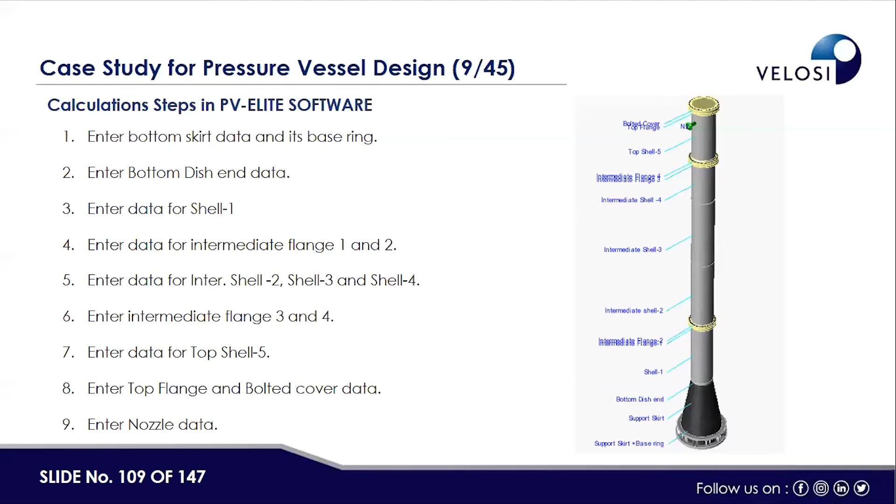Enter intermediate flange 3 and 4, enter data for top shell 5, then enter top flange and bolted cover data, enter nozzle data. As you keep entering, the vessel is made and you can see it on the side - so PV Elite is quite easy to use, not so difficult. Then skirt and base ring - for example, node number 10 to 30 is the skirt.

Cone skirt upper diameter 610 mm and base diameter 1285 mm is given by the client. Then enter material for skirt, which is SA240 316L. Total skirt length is 2007 mm.

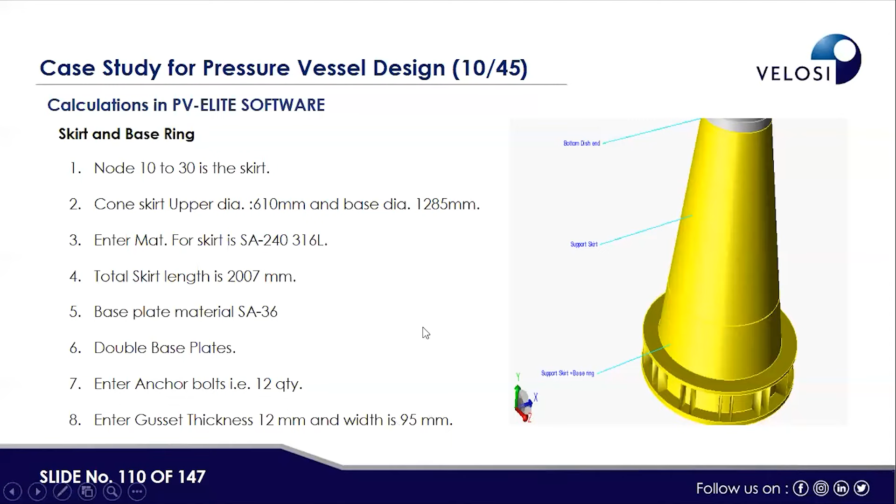Base plate material is also SA36. Then double base plate is there, you can see this here. Enter anchor bolt, which is 12 in quantity. Then enter gusset thickness 12 mm and width is 95 mm.

The skirt base ring data normally is entered as we described before. Then you can see how the data is being entered: base ring information, then bolting information, then set default value, whether analyze or design, we can do both. The material values, UNC type also is there, what kind of threads are there. And here the base ring type, whether this type, which type is applicable, we need to select that.

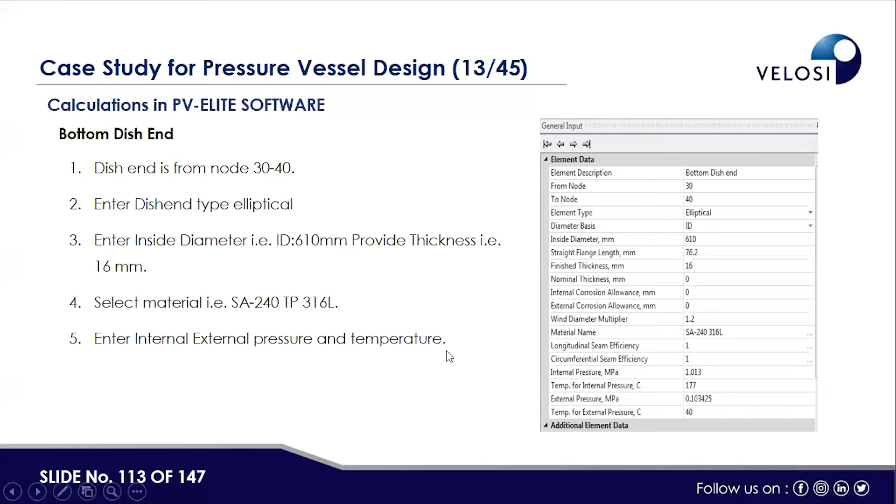Then bottom dish end is where the vessel starts. First one is from node 30 to 40. Enter dish end type: elliptical. Enter inside diameter, which is 610. Provide thickness, which is 16 mm, which is selected or nominal thickness first. Then select material of construction, which is SA240 type 316L.

Enter internal, external pressure and temperature on that particular vessel. The values are given here.

Shell course number 1. Enter inside diameter and length of the shell, which is 610, and length is 1960. Provide thickness with 16 mm. Select the material 240, same. Enter internal and external pressure and temperatures as applicable on all components.

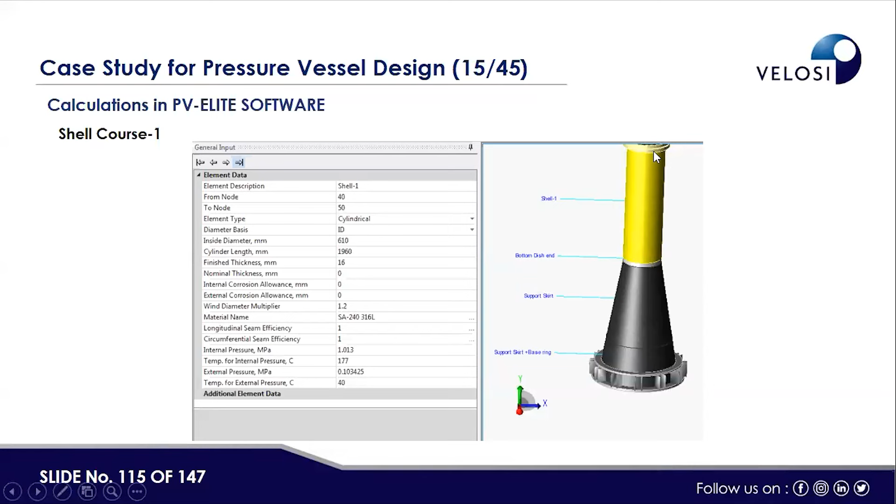If we entered first on the lower bottom head, then it would be carried forward to other sides as well. So we have gone to head, and then we have put basically the first shell, and then there would be a flange. As per the configuration which is required by the client, we can make step by step.

Course 1, then intermediate flange 1 and 2. Node 50 to 70 are the intermediate flanges. Flange height is 90 mm. Select material, then enter internal, external pressure and temperature, flange data: OD, ID, PCD, bolt size and quantity. Gasket data is also filled in. This is the field in the PV Elite where we enter the data of both flanges.

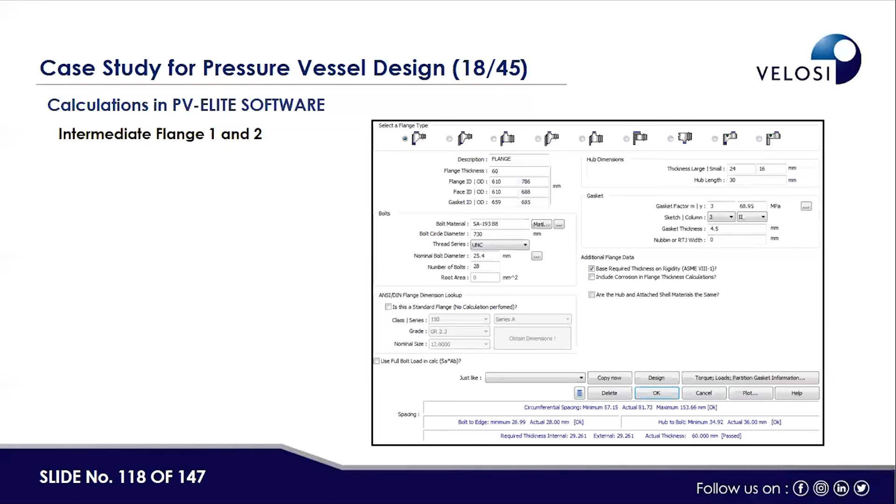So still data is there, and we have to see the flange type, and then accordingly all the data: ID, OD, PCD, type of material, threads and so on is entered. If we try to fill in, then we will have an example or sample also available, and you can also get help from the seniors. So then it's not so difficult if we have the guideline available, senior available. Yes, without senior, without training, it would be risky to design the vessel yourself because you will make mistakes.

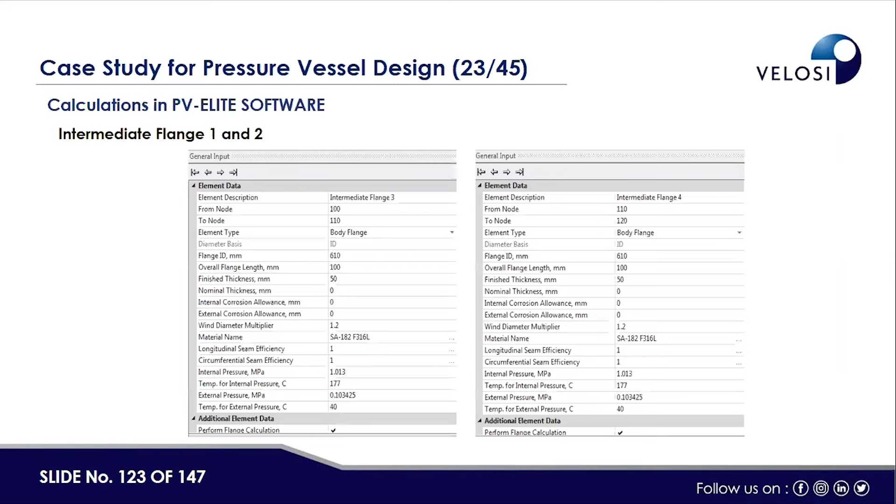So intermediate shell course 2: enter same diameter and length of the shell, then provide thickness, select material, enter internal, external pressure and temperature, or carry forward from the previous node as well. So this is course 3. Similarly course 4, then intermediate flanges again 3 and 4, same way as we did earlier.

Then also flange 1 and 2, shell course 4, same type of entry. Thickness has decreased. Like you see, the inside diameter and length of the shell 2 is shell 2, ID 610, ID would remain same. Length is 1300 mm. Thickness has been decreased from 16 mm to 8 mm. Select material, enter internal, external pressure and temperatures.

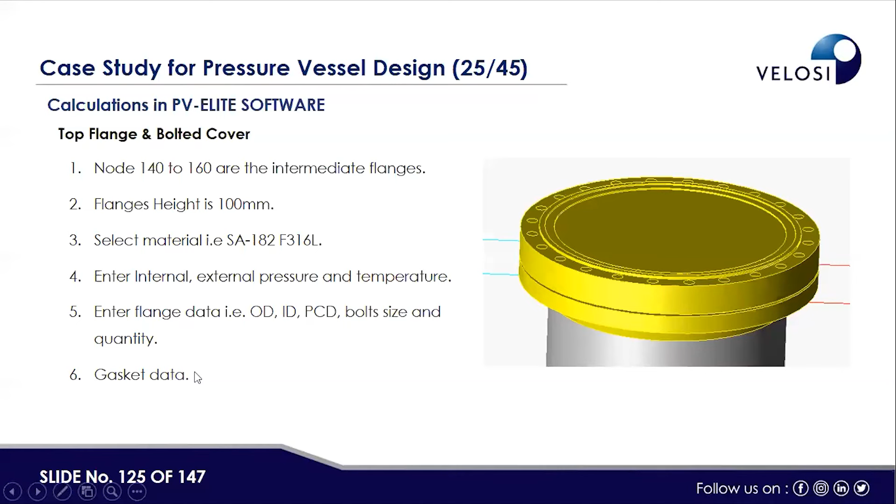Then we got top flange and bolted cover. Node 140 to 160 are the intermediate flanges. Flange height is 100 mm. Selected material is same. Enter internal, external pressure and temperature. Then the same flange data is added. Gasket data is added. Then nozzles type with the pipe and flange.

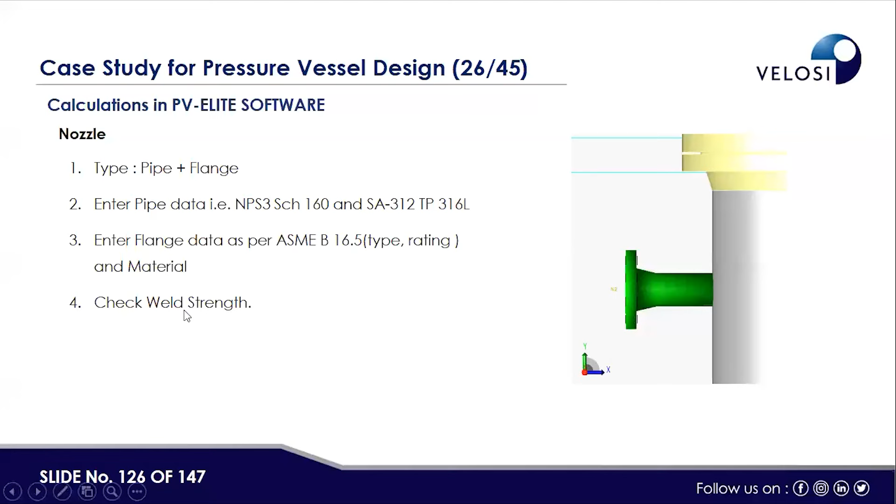Enter pipe data, enter flange data. Check weld strength and location also.

This is the screen of the PV Elite for the nozzles. Then calculation in the PV Elite software. After completion of the geometry input data, run analysis. You can also design or analyze. Two parts are there, so run analysis because you have provided all the input data.

And then you can compare that whether it's passing the criteria or not. Check the output from the report, and use this output to generate the general arrangement and fabrication drawing from the software. You can also do that.

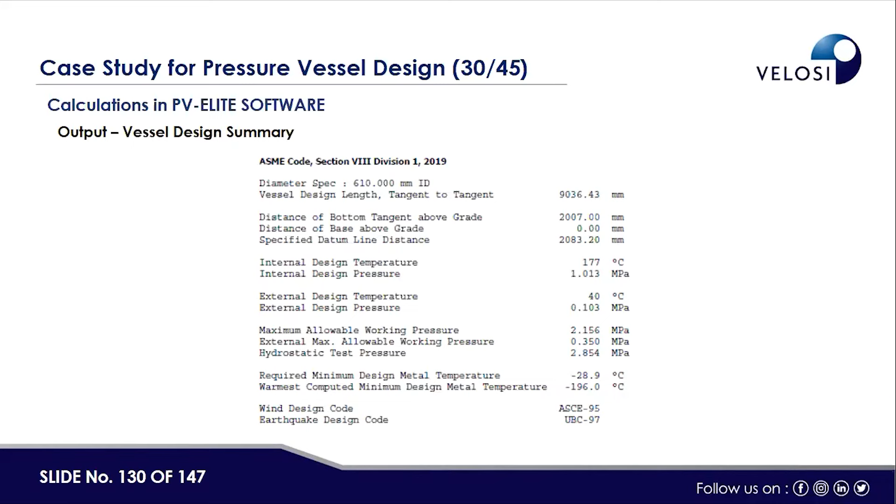So here is basically the complete vessel with all input data. You can print it out and verify. And this is a vessel design summary, showing whatever data we input.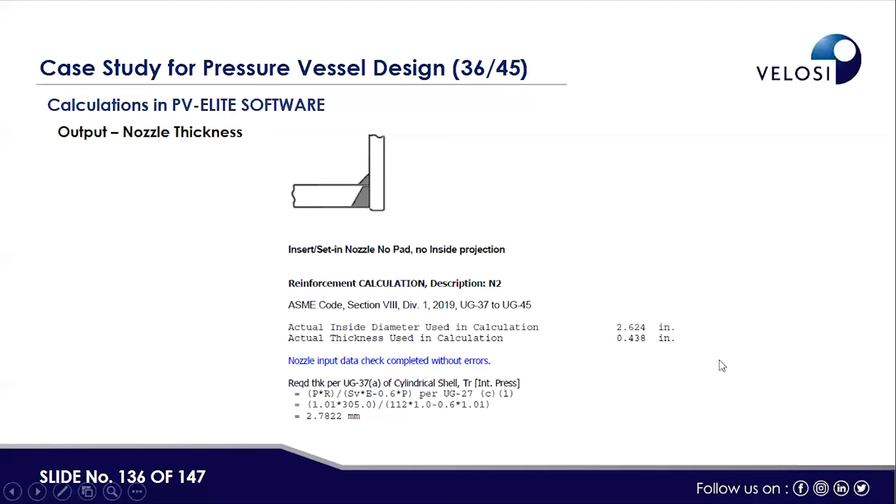So these are the nozzles, the type of nozzle we prepared - insert, set-in nozzle, no pad, no inside projection. This is what the design is.

Then reinforcement calculation is done by the software itself, and thickness is verified. Then output from the nozzle thickness point of view - parallel to the vessel wall, normal to vessel wall thickness, no pad - this is the thickness data provided.

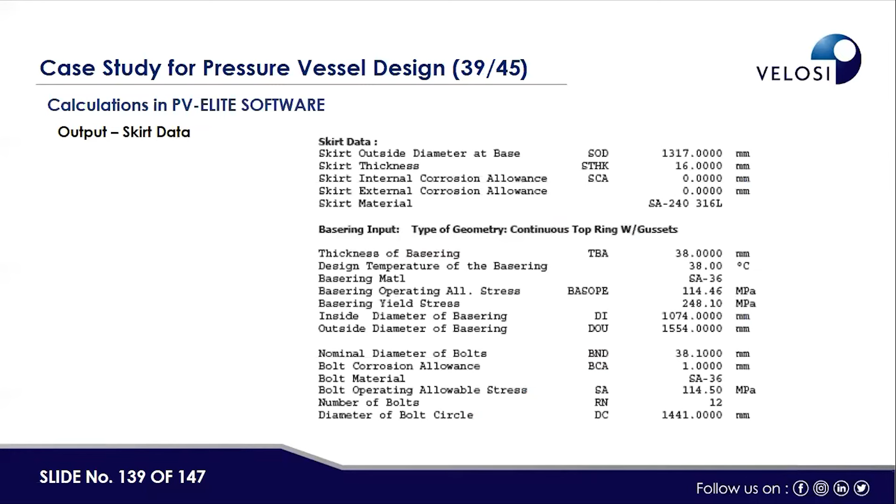So the result is that actual thickness is this, versus this. Then the next is the skirt design point of view, and summary of the basering thickness calculations.

So by all this checking, we have analyzed and got the design, and then we got the drawing also - general arrangement drawing generated by the software.

And then these are the more internal details which are provided - we can make these ourselves also. And these are basically the fabrication details of all the nozzles.

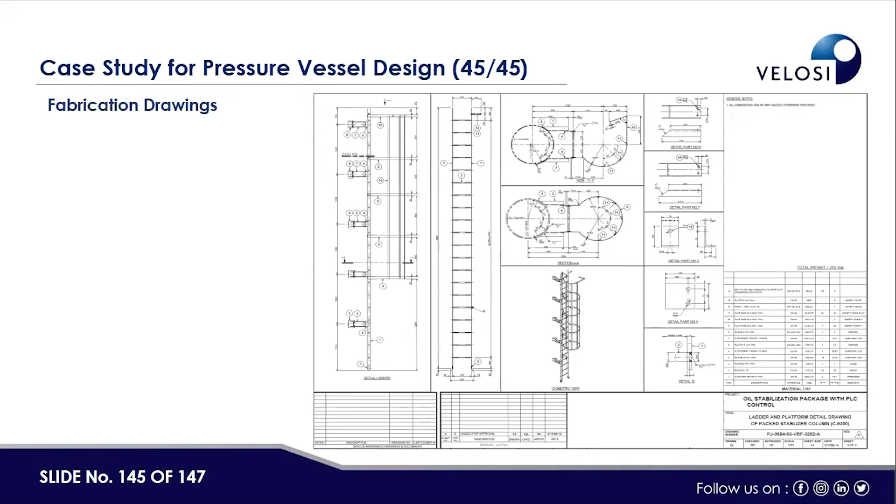So these are the fabrication drawings for the external ladders, platforms and supports. These support drawings are made by the mechanical engineers or the vessel design engineers with the details available.

So from a pressure guidebook point of view, there are general handbooks you can use - the pressure vessel design manual by Dennis Moss, or the pressure vessel handbook by Megyesy. I used mostly Megyesy, so it's quite easy to use.

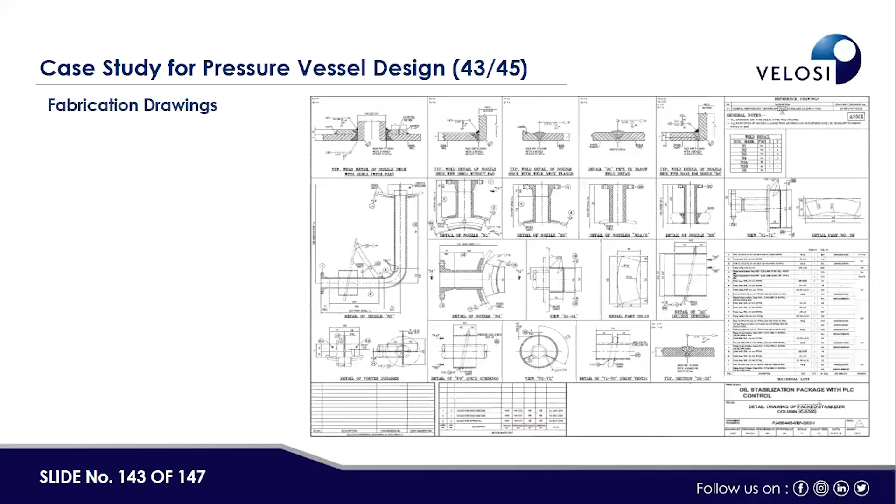So I've clarified how the vessel is designed, but you cannot practice it because time is less. If you want to practice and have access to PV Elite or any other software, you can follow along, or you can use Megyesy's handbook and do all these calculations by hand also.

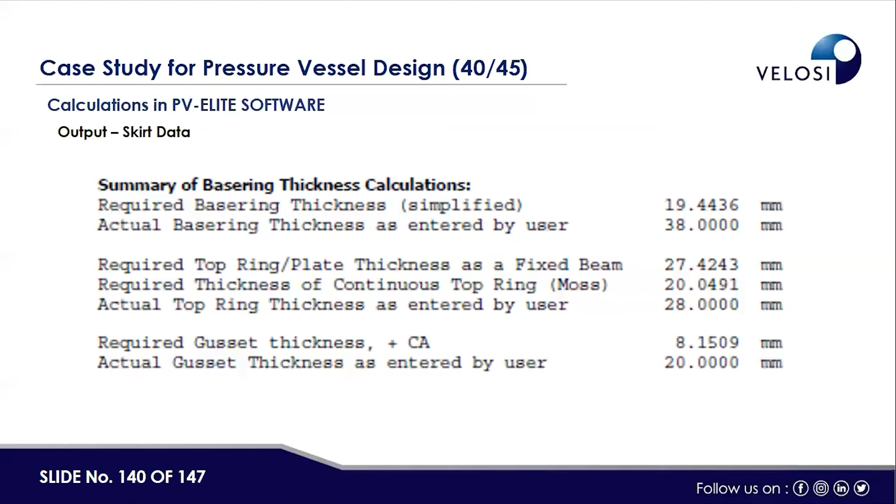Next question - pressure vessels under vacuum. See, if you look at this vessel, it's also designed for FV and shell external pressure. So this calculation is done for external pressure. The pressure vessel is designed both for internal pressure as well as for external pressure.

If there is any localized pitting corrosion, depth size 1.6 millimeters in cladded shell, 30 mm base metal and 3 mm SS cladding, and the pressure vessel is PWHT, is it mandatory to repair the pitting or can we tolerate them? Today's subject is we are designing a new vessel.

Yes, this is the FFS case. If any vessel is cladded and there's pitting in the cladding, that can be repaired because PWHT is applicable on the base metal, right? If PWHT is also applicable on the cladding material, that would be a difficult aspect. So my understanding is PWHT is done on the base metal, not on the cladded vessel, because if you do PWHT after cladding, then due to the difference in coefficient of thermal expansion between carbon steel and the cladding material like SS316L or other, there could be a breakage of the material.

Next question: what about re-rating the pressure vessels? Re-rating the pressure vessel is like if there is metal loss, and if your vessel has lost some certain thickness or has some certain defect, and you are unable to repair that defect, then a re-rating is done to lower the pressure of that pressure vessel or equipment.

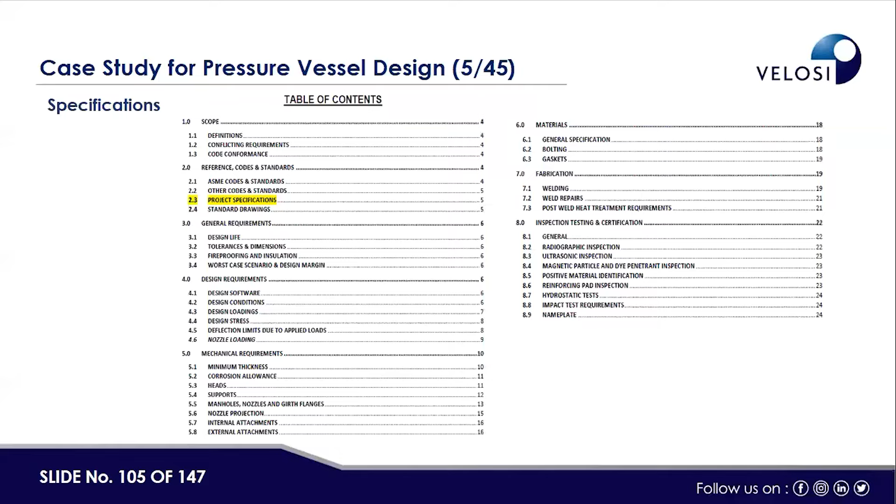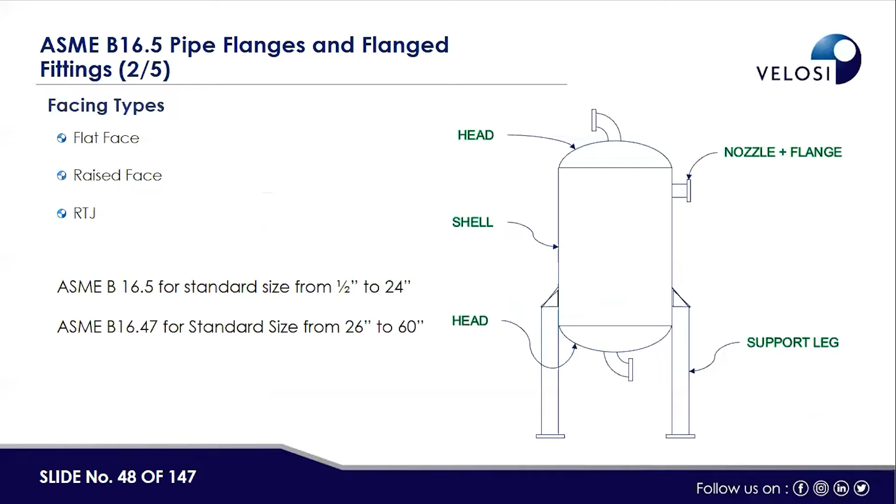Next question: what are the recommended thicknesses for pressure vessels based on operating temperature and design pressure? Let's say design code ASME Section VIII Division 1, refrigerant and ammonia. If you remember, we gave the thickness as 2 mm, sorry, let me go to that particular slide, the minimum thickness one, 6 mm. Forget this slide, 1.6 mm, then 5 mm or 6 mm, three thicknesses are given basically for different scenarios. I forgot that particular slide and it will be difficult for me to find it now.

But minimum required thicknesses are given for different services. One for water and air, one for unfired, 6 mm is the minimum thickness I think on the refrigeration side.

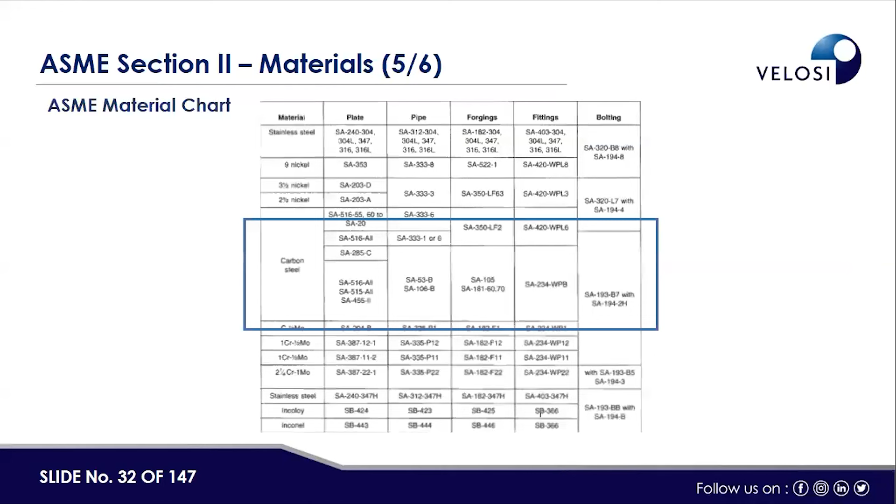Okay good, next question, because I'm able to find that. Is load during shifting and lifting considered for designing the vessel? Yes, when you're lifting, lugs are basically attached with the shell or any location of the pressure vessel, so those loads are also considered in the calculations.

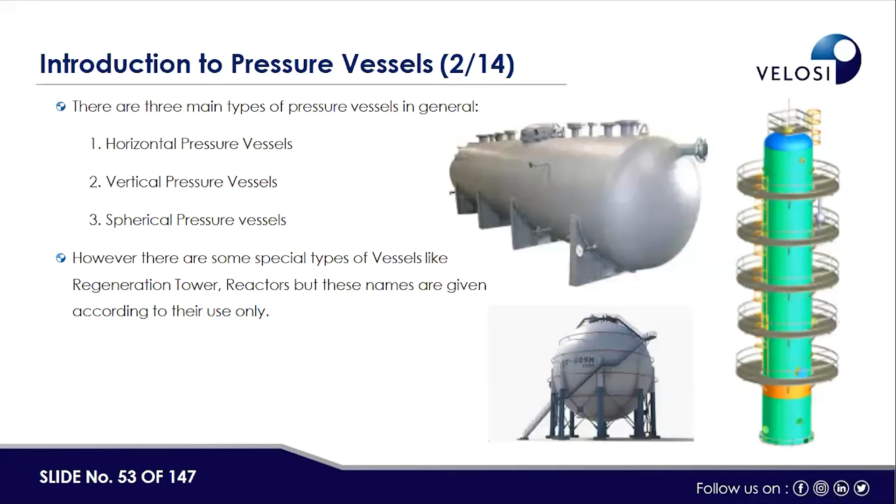Next question: what are the major factors that we should consider when designing a pressure vessel? See, there is UG-22, all kinds of loads, internal, external, process, wind, seismic, weather - all kinds of loads are required to be considered.

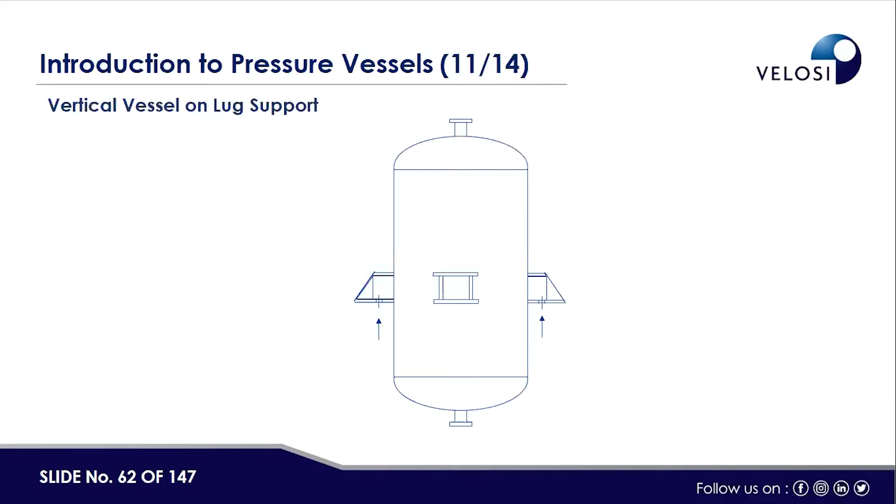Next question: what's the flange diameter criteria? Flange diameter criteria is as per the applicable nozzle, right? If a nozzle is 2-inch, flange would be 2-inch. If the nozzle would be, let's say, 24-inch, then flange would be 24-inch.

Next question: is there a limitation only for diameter? How about the length? A length is like, when you are making a nozzle neck, a standard length is also given, and sometimes you can increase it a little bit based on the configuration of the nozzle to attach with a particular vessel.

Next question: do we need to remember these codes such as UG, UW, and UB? No, we should know that these are the relevant sections and the time of use. We can go to those standards and open them.

Next question: for which vessel do we need to perform PWHT? What is the criteria? Lethal service and thickness more than a certain limit, then you need to do PWHT, and certain carbon contents also matter. These requirements are specified in the UCS requirement, and those can be followed.